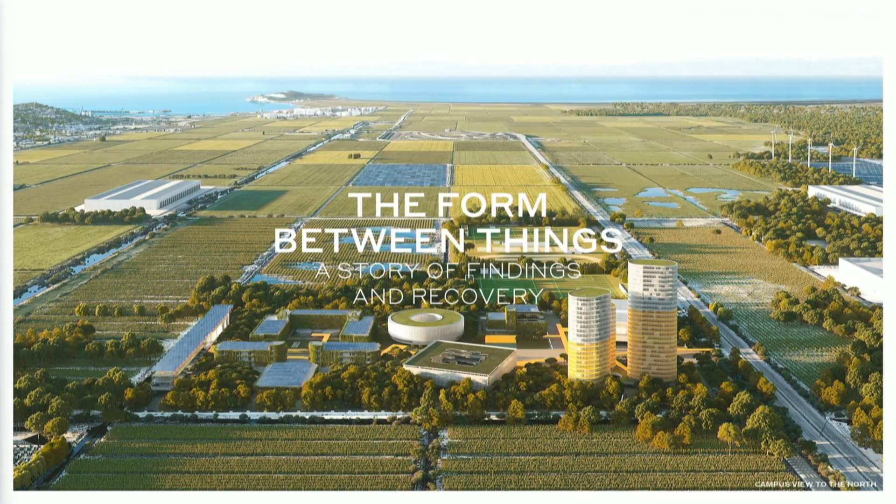I was just going to present for a second this story that we have told, the story of findings and recovery. This story is a story about architecture, but not only about architecture. It's a story about landscape, about the territory, about resources, about future development. It's a story that talks about water, not only rainwater or salted water, but also underground waters from the aquifer that we have below our feet. And it's a story, finally, that talks about the public space, and a story that talks about the space between things. So for this story, the storyteller today is going to be Fernando Rodriguez, my partner.

I am Pablo Oriol from FRPO, and I have to just present quickly the team that we are accompanied with. They are here with us: Porras La Casta Arquitectos and Walk Architecture and Landscape from Madrid. They are the designers of beautiful public spaces around the world in different places and territories, but also of recovering landscapes. They have a wide experience on this, so we wanted to be accompanied by someone that could understand the territory in a deep way.

We have also a studio from Tirana. They have local knowledge of the place and have been working for many years on the Durrës strategic projects. We also had a very strong group of technical consultants, among which we want to mention Teo Lopez, the most renowned energy consultant in Spain. He has worked along with the Geothermal and Geologic European Institute in Spain from CSIC, which is the main investigation institution, and that has helped us to work on this. So this is the team that we have been working with, and I leave this to Fernando to start the story.

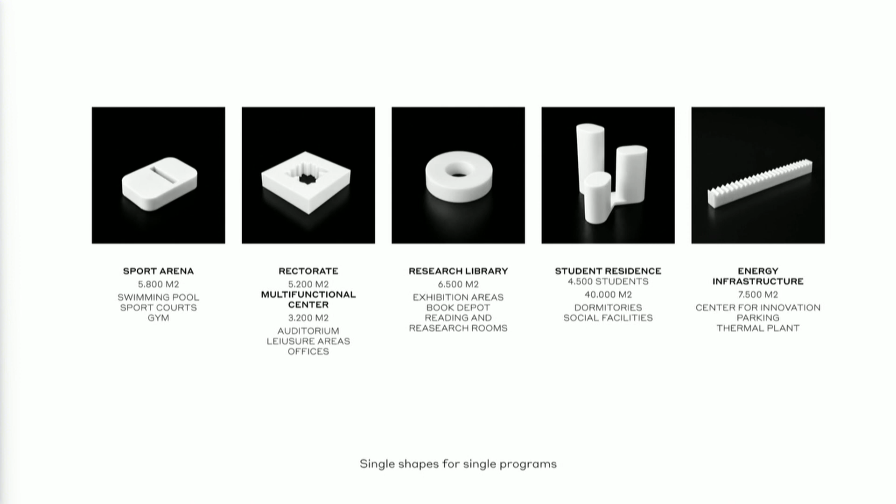This is a story about single objects, single shapes, very direct, simple but different, providing a single identity for single programs that can be easily interchangeable. This is also a story of master planning, which allows different architectures, also maybe architectures from other teams in this competition, to be part of the main idea.

Master planning is not that much about buildings, but about the form between things. It's not about the well-known megastructural approaches from the 1950s in universities across Europe that we all know well, but probably about a more careful way of inserting programs in independent elements that can be approached in different phases.

This all happens in a specific territory, which goes from the wetlands to the beach, a territory waiting for its logic to be unveiled, a horizontal territory with no reference at all.

We have been here many times already. It's organized in different layers, with urban artifacts, existing infrastructure, this new infrastructure which is the railway, an amazing opportunity to link the whole area to the metropolitan area, an agricultural pattern, green areas, and also a very strong and present water system.

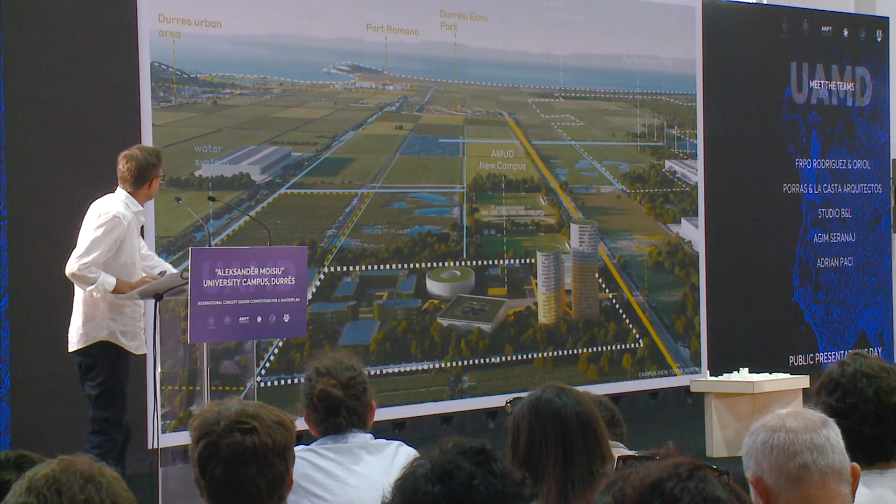These layers are taken into account and used to design the new proposal, thinking that they also provide the logics for future development of the whole area. The campus would be like a prototype to develop the whole area in different ways.

In this superblock model, a very simple and direct approach, it provides different percentages of the elements used in the project, like footprint, reforestation, water surfaces, permeable ground, and roads, so these guidelines can provide different approaches.

Of course, the campus superblock, but also to generate industrial or logistic superblocks, to maintain or remake the agricultural superblocks, or even to address what happens in this residential area to the south that needs to be reorganized without being completely substituted.

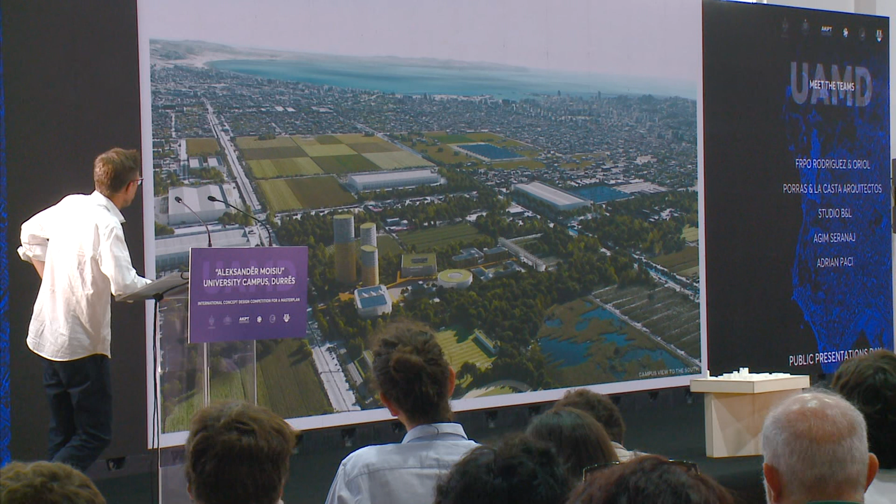This contains as well the logics for the extension, the future or possible extension of the campus, or the campus to the west, in a way that what we are providing is a prototype for the development of a bigger territory.

Form matters, but not so much the form of things as the form between things. This sentence by architect and professor Stan Allen, which has been with us for many years already, is very clear about what we understand a campus master plan should provide, which is public free space for things to happen.

Indeed, a very important public space in the middle, which is a big void, a Mediterranean public space paradigm. The proposal tries to embrace the center of the master plan with our reforested forest, placing different buildings to the edges, to the outer ring, to maximize this void that takes the cars outside, circulating them in a ring road, and maximizes pedestrian space.

This central area, which we call the spine, provides public spaces that are really the most important areas where university life takes place, the exterior areas where institutional events, random events, or spontaneous meetings take place, giving a real character of university life.

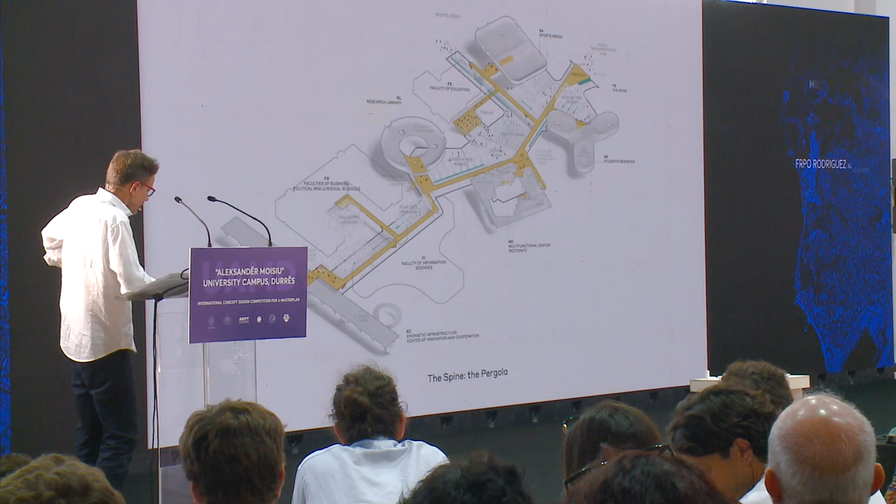The second element, the pergola, has to do with traditional elements throughout the Mediterranean area. It's a very simple, painted concrete structure that allows connecting, provides shadow, and also builds a series of episodes around this public space, which intertwine with one another.

Like a main entrance to the west, a central agora with a tribune in the center, a central agora with the dry fountain also next to the tribune, cherry gardens and fruit trees, different orchards or even meadows for resting.

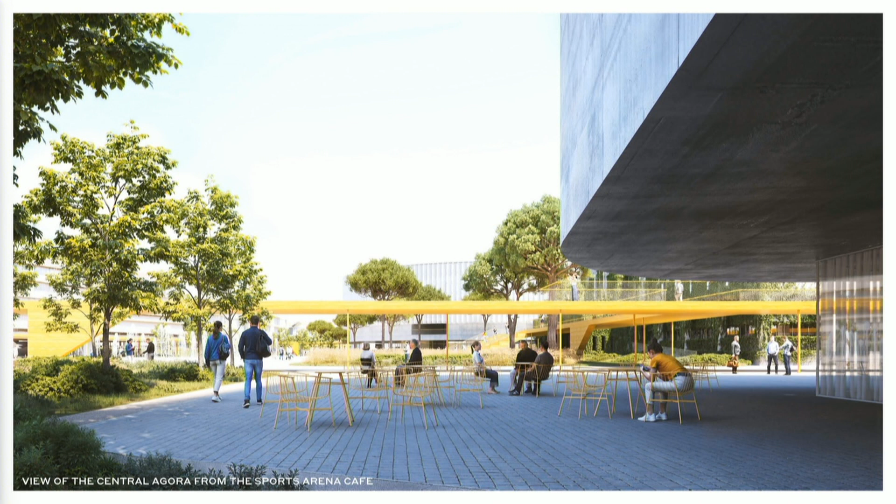These are some images of this space in between the buildings, formed with different features, mainly with grounds and this intertwining element, generating a sequence of different spaces throughout the areas where it collides in a way with the proposed buildings.

The natural history of this territory is very rich, and it allows us to think about the idea of third nature. We all know about first nature, the native marshland landscape thousands of years ago, which became second nature, a man-made agricultural landscape in the second half of the 20th century, and which we propose to transform again through this third nature idea, or performative landscape.

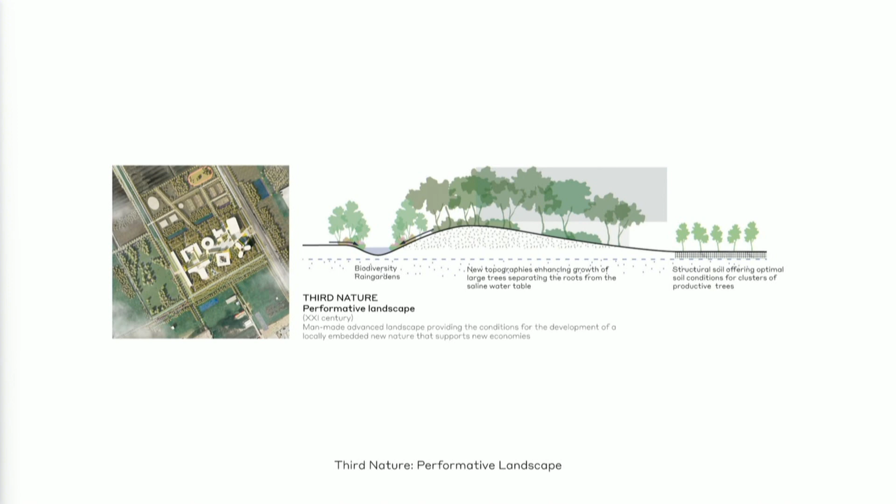This is a very important part of the project because it provides the conditions for this natural surrounding to really happen in such a salty and not that good environment as we have seen already.

This performative landscape is built out of three actions. The first has to do with drainage, waterways, and water surfaces. The second has to do with building soft hills and mounds, which provide new soil for the pine trees to properly grow. The third is a more controlled nature within the public space of the spine, which relates more to gardening and recreational spaces.

This provides a sequence of different sections, in which the whole space of the university is modeled out of these three actions: the perimeter ring road, the perimeter rain gardens, the in-between forest hills, and the pergola within the spine in the middle.

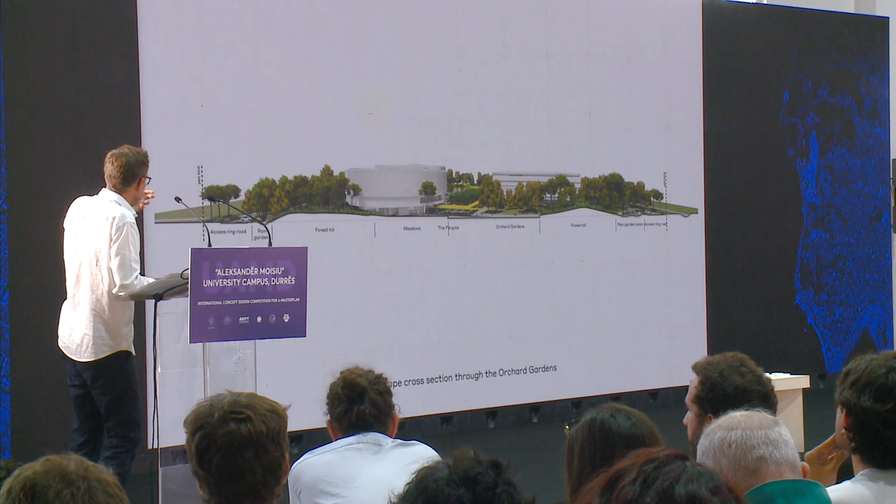This surrounding nature, filled with wilderness and water, keeps the cars outside the center of the project. It has different shapes and always intertwines with the spine beneath the buildings, providing back accesses to the main programs, which then lead to the main public space in the middle.

The spine, this void, this public space which is the core of the master plan, is made out of four main kinds of landscape. So-called hardscape, like pavements, provides circulation and meeting spaces.

Softscapes, which is about different kinds of vegetation that take the nature of the area inside the plot. Ground and waterscapes, which recover this beauty embedded in the water.

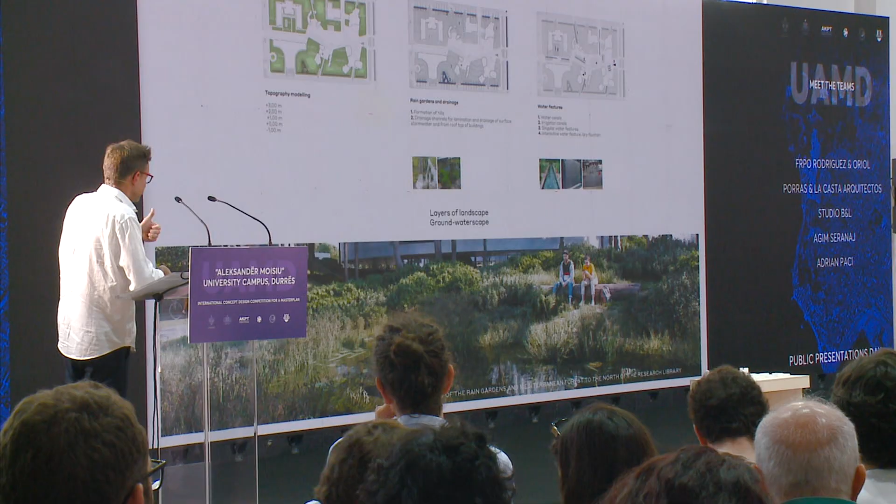And eventscape, which provides situations for big meetings and university life to happen. There are some images of the back gardens.

This is about visibility and feasibility of a public investment, which for us has been something we struggled with a lot in making this master plan, because we needed to place 4,500 students inside, which is a lot, and we thought there was also an opportunity within this territory.

We thought about making the public investment visible and connecting the university to the city, making the citizens connect to the university, throughout these student residences. Some kind of financial building strategies will provide us the idea that the residences and also the energy program might act as an asset.

An asset that can easily move from a very compact shape to a more disaggregated and phaseable group of elements, which could be interesting for a public investment and for a private investor, providing a kind of public-private partnership, and therefore connecting the students to the territory through the views from these residences, and the citizens to the university, with this element acting as a reference in this horizontal landscape.

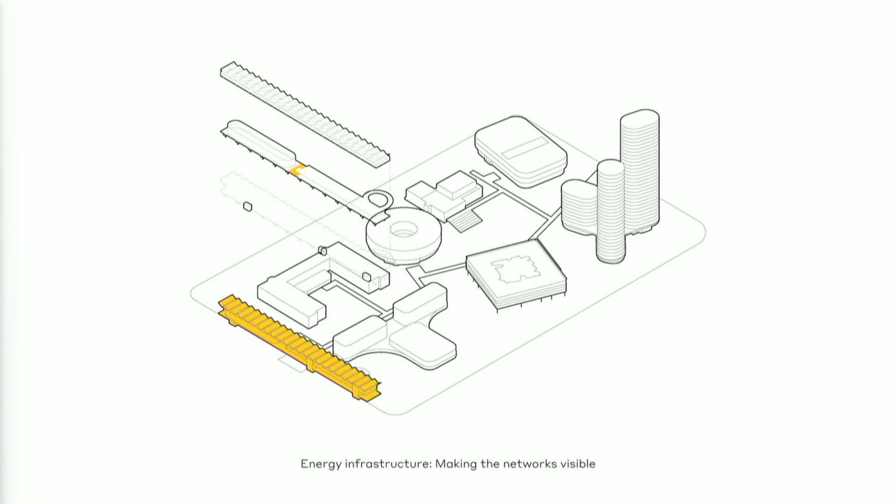This one we can see here, which is also hosting the main parking, the power thermal plant, and the innovation center, provides this kind of image of the campus as an energetically aware condition that links the campus to a very contemporary debate. This is an image of this energy infrastructure closing the campus to the possible future expansion to the west.

We're almost finishing. The 7th chapter refers to the fact that universities act as a social infrastructure, right? This image of the FAU by Vilanova Artigas, this beautiful, amazing project we all know, talks about free ground, about building open architectures for things to happen, underlying the idea that what we are providing is much more like a series of guidelines to build some buildings.

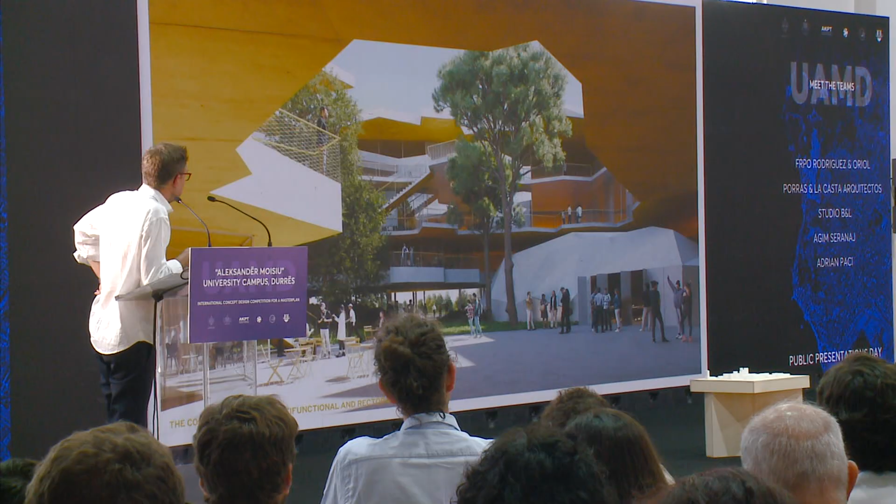Rather than architectures themselves, by making all buildings elevate from the ground and generating this free ground, trying to build always with concrete structures and light programs on top, making patios inside every building, providing passive measure envelopes for each of them, so they can host these programs in a very simple way in each shape, while maintaining character in general terms as the general guideline architecture rather than build-centered design architecture, which is what we wanted to present here. I'm finishing right now with a kind of epilogue summarizing these ideas.

Please, your time is expired. Thank you so much.

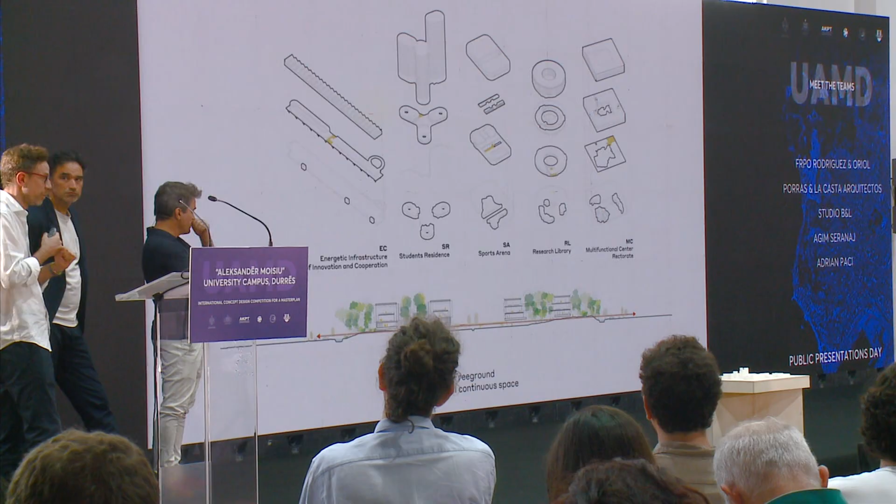But the most important thing for us is much more what these five examples summarize - like the idea of making the ground floor free, reduced to the minimum expression, with the program laying on the ground floor, concentrating heavy programs on the first floor, which are also accessible, making the first floor accessible, and trying to organize the upper programs in a very rational way, always around the patio. You want to add something?

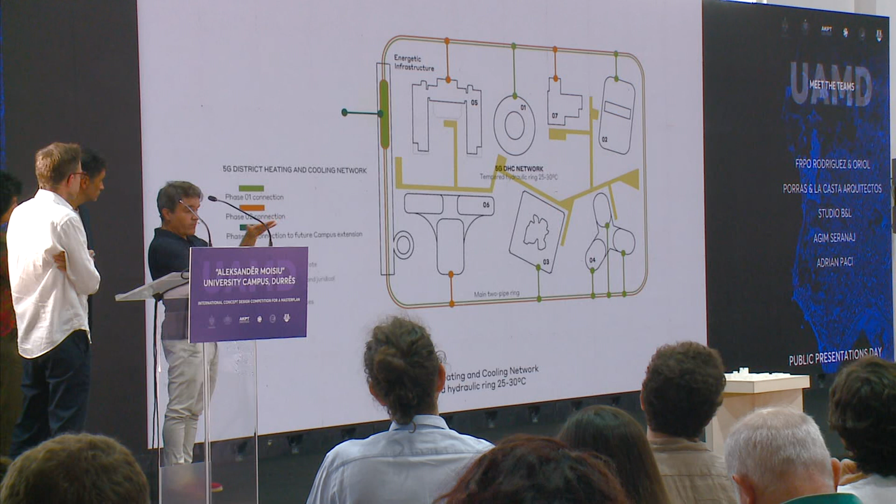And you were asking, Christian, about the pergola also, about why that element. This relates to what Fernando was saying about the connection of the free ground - that's the whole point of the pergola. It's an element that, in a very cheap way, can connect everything and give an image to something that will develop over time, maybe made by several different hands. This element works with all these conditions of the ground, the free ground, the two levels, etc. But it's also giving, in a very low-budget solution, a specific character to this campus. This is also the reason for it.

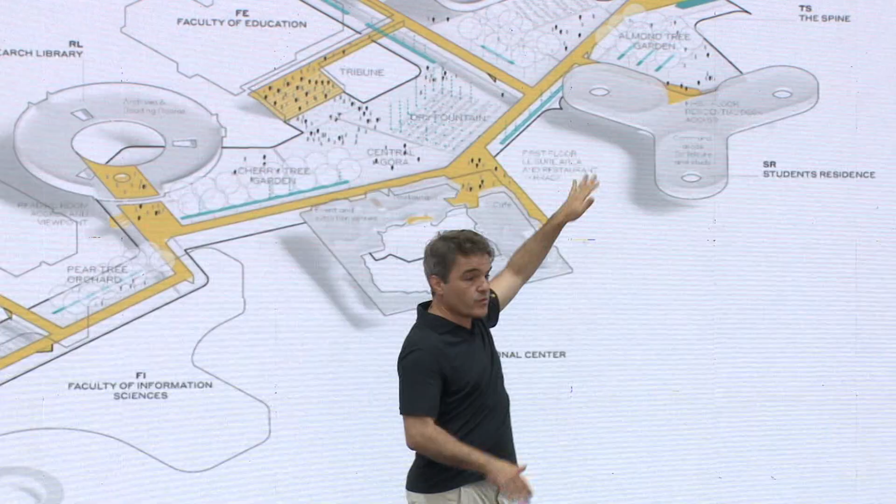But the pergola is not just a pergola, it's also a bridge. You can walk on top, but only at certain points - not that you can walk all around it. You can use it to walk up to this element, the tribune, or there's a ramp that goes up and uses part of the pergola to reach the upper level of the residence. So it's a pergola, but also usable accidents to connect and bring the ground level up to the first level near the buildings.

Why can't I go all the way on the bridge? That's a big question we've asked among ourselves many times. I think the answer is there's no need for that, because you can walk underneath, in the shadow, or when it rains you can just walk around the whole thing - no need for bridges connecting all the buildings. This is about landscape and free ground.

But then why should it be one continuous thing? Couldn't it be fragments? Why do you need the figure of a single element? It was a very simple question - about being able to go from one side to the other without getting wet when raining. It was this kind of super functional decision, because we had many different options, as you may have seen. But in the end we decided to make it super simple.

It's something that takes you from the main access to the east to the secondary access to the west, and allows you to leave your car here and get to any place without getting wet or staying in the shadow. A very functional condition.

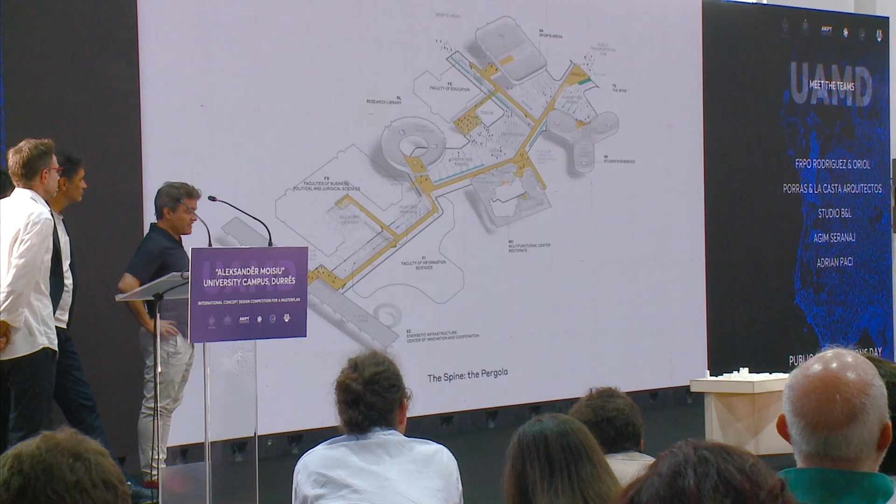May I do a very innocent criticism of it? I think it's a bit too thin - you see in the renderings there's not much shadow. It probably should have been a bit fatter. Why didn't you?

We did it low on purpose, as low as possible, because we thought you have to connect from down to up with these connections. We did it low because we're in a Mediterranean situation where you have to be covered very near your shadow, not with high canopies but with low things. It's like 2.80 or 3 meters inside, and 4.50 wide. So it's also a matter of a delicate element, something that can be very cheap and easy to work with. There was an image of Mathias Goeritz's El Pájaro de Fuego, that beautiful but very cheap concrete sculpture in Guadalajara, Mexico, which has had a very powerful impact in the area as an attractor of public space, with very low means, very easy means.

But maybe you're right, Jesus Christ. No, I'm thinking of something like the Ibirapuera canopy by Niemeyer - it's really, really large. Because in order to produce a lot of shadow and generate the climatic effect, it needs this kind of section. But okay, it's an open discussion. A month ago Fernando and I were in Ibirapuera talking about this. But that's another thing - it's a huge element, very deep. We didn't want to make it so huge, but very delicate.

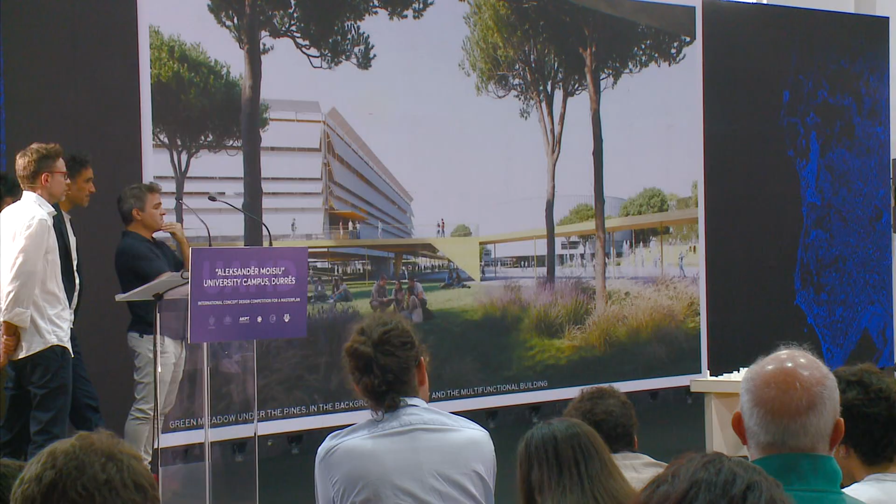Thank you so much for the presentation. I want to congratulate you on the material you're showing - the drawings are beautifully drawn, the model, everything, the atmosphere you're conveying through the images. I guess my only question, since you responded not only in the presentation but also through the material to all the questions one may have, would be...

How does this canopy, which is kind of like the signature, the thread that connects everything, with a specific geometry different from the straight geometry - which I think is perfectly fantastic - how does this broken geometry create in-between spaces, which I think is the intention, and connect existing with new? And how could this master plan be implemented or somehow connected to what happens in the rest of the area, if there's an intention for that to happen, of course.

It's working? Yeah, so indeed it comes together with the question about why not making a bigger straight line and more clear, connecting from A to B, but at the same time creating spaces, as you have mentioned.

We wanted, from the beginning, we understood that there were 3 areas. One was like the entrance area on the right side. We had a central area, like we call the central agora, which is the largest space that we wanted to keep intentionally open.

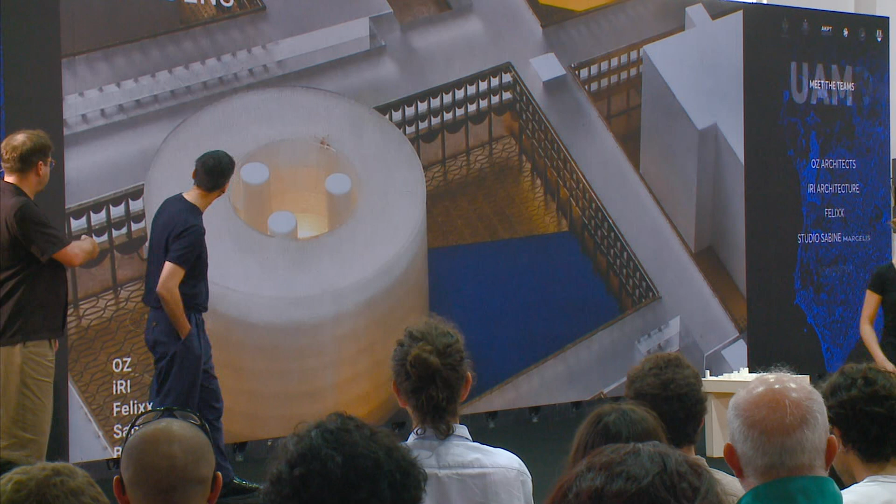Can we start with... oh, it's a bit wrong.

Good afternoon. My name is Andreas Caravanas, and together with my partner Stefan de Koning, we are representing OZ, and together we are going to go through our project, Live in Gardens.

Maybe Stefan. Yes, we're here together with our great local team, IRI. They're well represented; we have a long relationship with each other in the business. Felixx Landscapers are very well known for their Dutch approach, being experienced in polder landscapes. Also, they work with both greenscape and bluescape.

Sabine Marcelis is part of the team for color and materiality, a great inspiration for this project, and Buromilan has been very supportive in making this a very feasible project.

So a driver to participate in this competition is also reflecting a bit on our own work. The Hive is a project in the Netherlands where the old and the new coexist. This is very applicable for this location in Durrës. Here we elevated the existing structure, meaning the landscape becomes undulating and the binding factor between the old and the new. Also, main entry zones become part of meeting and collective spaces.

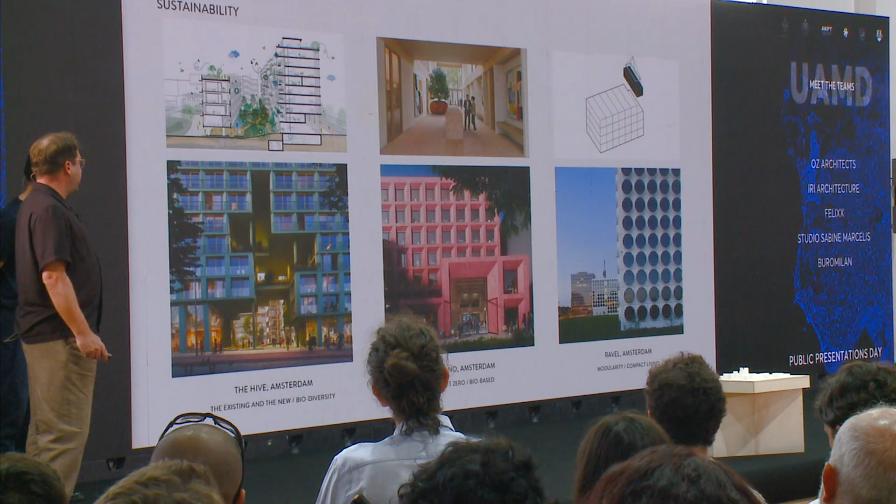First of all, student housing is something we are very experienced with, and this is a modular structure which is very adaptive and affordable.

Now, within our projects with student housing, we always deal with high densities. But what makes it a proper student destination or place to live? It has to be affordable, effective, but at the same time it needs to be a self-sustaining compound.

What we apply here is places to reside and to meet. Sure, color is an iconic instrument to make it a presence in the vicinity.

Then the Ravel project in Amsterdam on the right is, you could say, like an enclosed enclave. It's in the middle of the future CBD to be constructed, so it tries to protect itself from its surroundings. What is relevant here is that the facilities are such that it's not only for the residents themselves, but also an attractor or a hub for students.

Abroad. So what can be a very good strategy to make the projects feasible is, we have two exemplary projects called more like student hotel mixed with student housing, meaning that residents can leave in the weekend and the rooms can be rented out to temporary visitors. You have a double occupancy and a double revenue.

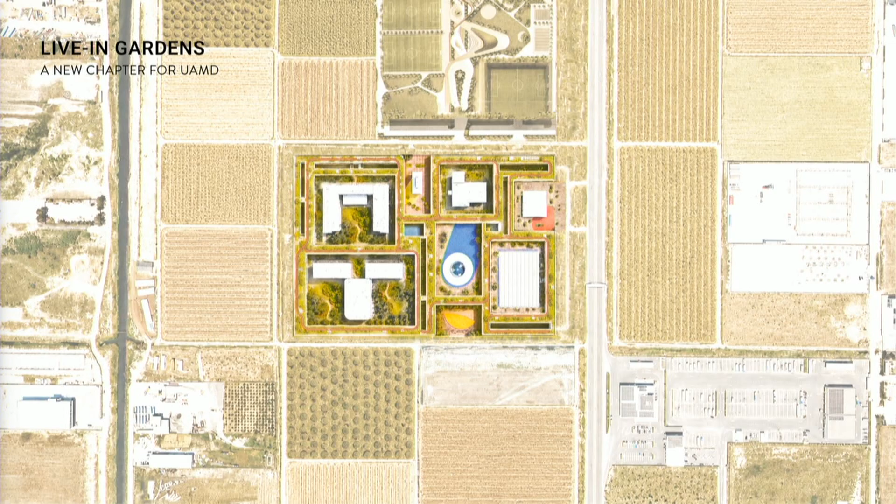Then when we look at the site, and finally the project, what is intriguing to us is the kind of tapestry, the patchwork of agricultural context. Yet, at the same time, we know that in the future a lot will be developed. So our strategic approach was to make a walled city, as you like. It is deeply inspired by the patchwork, so it is like a continuous carpet of gardens.

And from looking at Durrës, it's been addressed many times today, we actually embrace the medieval history and its walled former city with landmarks. Maybe it refers also a little bit to the kulas and the fortified towers. And this is an inspiration to create a master plan that kind of correlates with this.

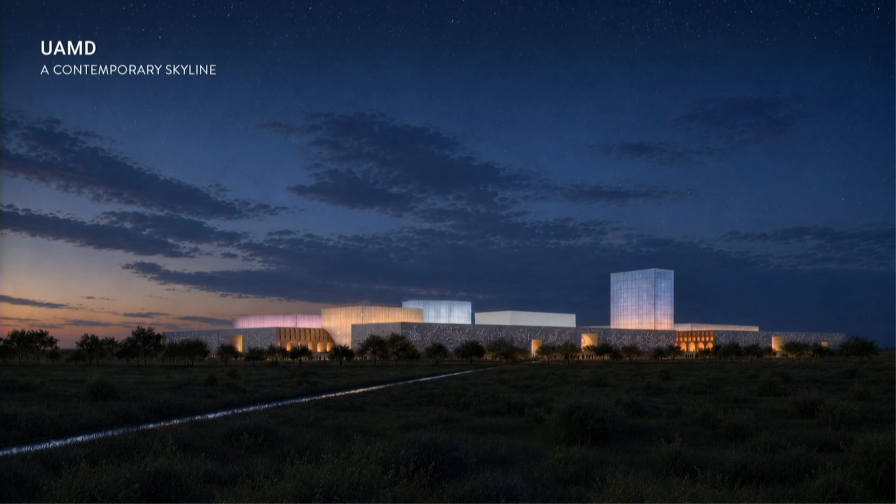So what is important for us from the beginning of the project was that the approach towards the site becomes also a reference for Durrës.

So what you see here is how we approach the site. You have this lower level, this donut with housing, and then all the other buildings as transparent lanterns referring to the medieval city. And the way that we created space is through a reference of Oda, where it's a meeting place in a house where other rooms would meet. So we almost literally started analyzing the decoration of this space and the centrality of it.

And then we come to one of the images, one of the courtyards that we are creating, that it opens up to the landscape. And it always has this central element that it's the educational building or the public building. And how we came to that.

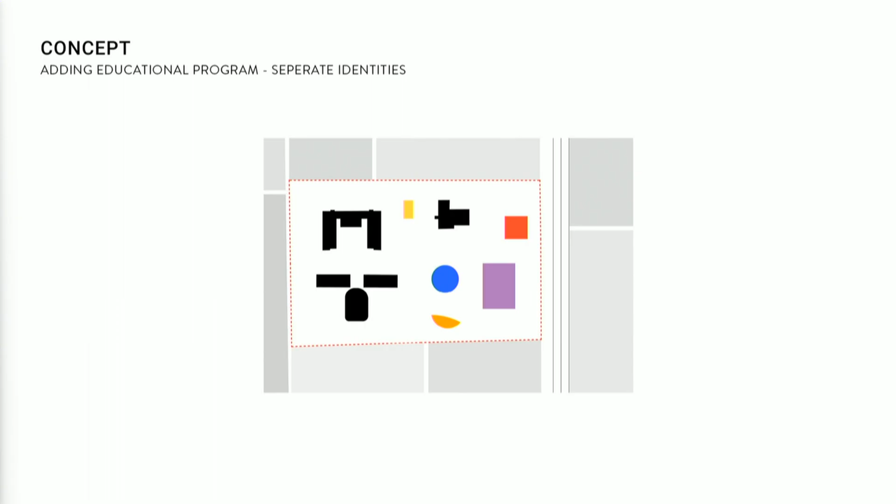So we took as a given that these buildings exist and also the agricultural grid. So we said, okay, whatever is educational program or administration creates its own identity. The color comes also later.

And then what defines also a medieval city or a kind of center of the city is the housing. So what we wanted to do is to create a kind of element that occupies this area and creates the courtyards. But what we didn't want to do, basically, is not to have a modernistic kind of approach.

So all this becomes not a linear approach, but it has elements where people meet. So all these courtyards become an enfilade on the ground floor. And then what was also important for us is that you have designated areas where you enter the site, but then all the other site is not linear from A to B, but it creates all these spaces where different circulations meet and occur.

So exactly this, the housing stays very low. It's intentionally made in order to create interaction and to activate the level of the ground floor. So not standing buildings, but also all the housing becomes part of the landscape. And no tower, basically, so we don't stack housing.

So at the end, you enter a site where open and closed becomes one. So here you see the plan where all the yellow part is covered, it's a portico. And then from one side, you have this kind of Mediterranean approach with a portico that opens up in the middle and creates this main square.

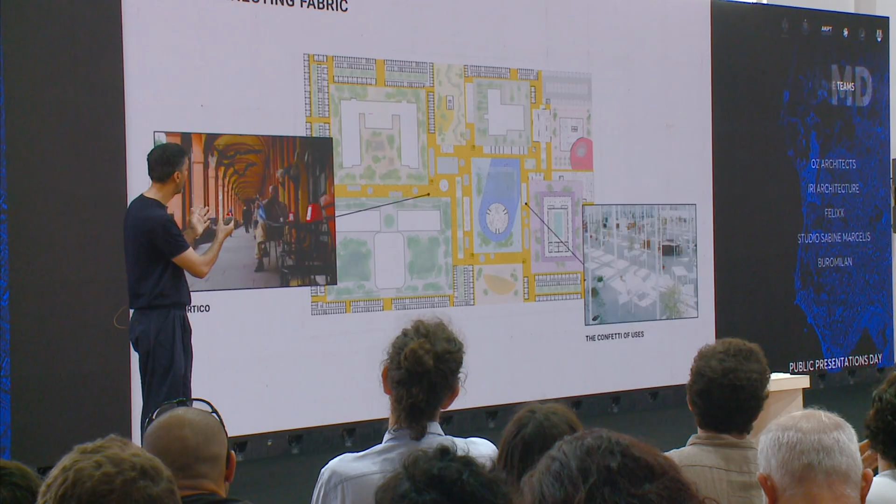So we have a definition of squares also. And at the right side, you see that there are all these confetti of uses in the space that generate the space.

And the color is something that, of course, we worked with our artists on, but we also wanted to make the squares bold, but also not in a literal way. So we wanted to create for every square an identity that relates to the heritage of Durrës.

And then we have the approach. So every courtyard has its own facade, and it again creates a mosaic of different spaces. So from space to space, you are getting to a different geometry. And then this is one of the squares where the pattern of the ground becomes almost a carpet, and together with all the others, they are creating a continuous carpet.

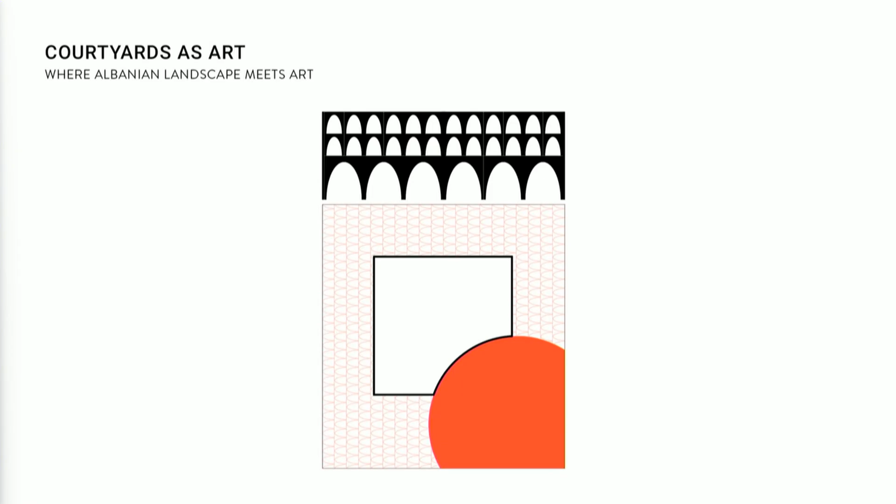And here is the inspiration, the work of Sabine, that we worked together on. So both layers are coming back to the project.

And then we have the entrance, the main entrance from the axis, where you have the Meet and Innovate building. The transparency of the buildings, you will see also afterwards, relates to a kind of administration that is not hidden. And then all around you have the housing. And then we go to the landscape.

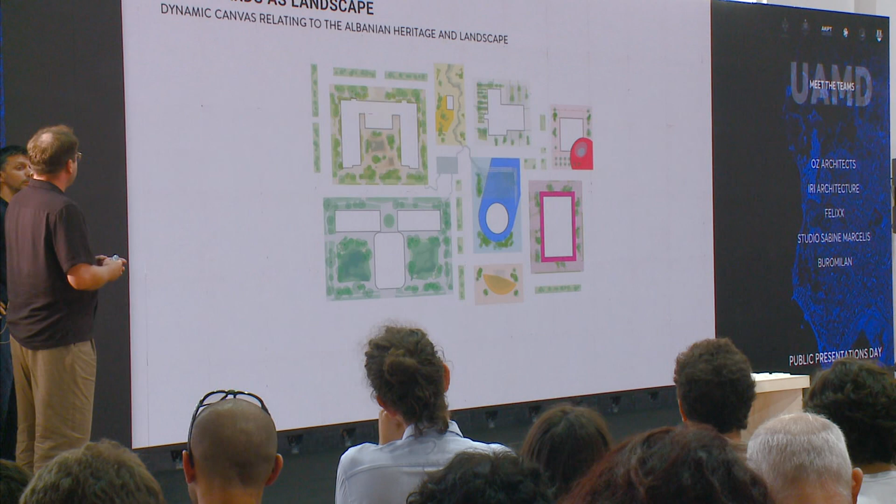So for the landscape, as explained, it's a continuous carpet. Yet within the courtyard, different landscapes can coexist. Some are more dense than others in their greenery. For example, around the existing study for politics building and the business school, we envision a more garden-like landscape. As of today, we see the plantations here as well. Others, which are more related to the context and arrival, can function more like piazzas or plazas, also containing more flow and population of people.

Now, looking at where we come from, to maintain this landscape and to embrace it, Felixx was very clear: we have to stop fighting water and natural elements, and instead embrace them. The site actually used to be in the Adriatic, and after becoming a lagoon, it was poldered into an agricultural site, as of today. Now, urbanization is going to happen, and what we embrace is this grid approach of linear canals and master planning.

Now, to bring this into the... it's not working? I think yes. Okay, thank you.

We foresee each landscape can actually have a different theme, and it can have its own character. What is it based on?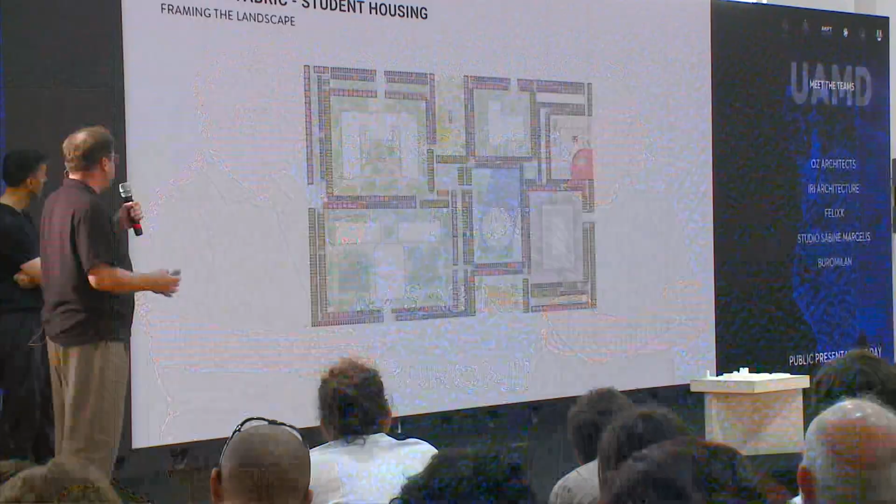When we come to the housing, it's basically an organizational principle to define the different gardens and piazzas. What we try to achieve is a permeable, accessible site where everything is also naturally ventilated and illuminated.

Each room can have a view to the garden it links to, so there's always light conditions and natural ventilation. Also, we propose to recess the facade and make a French balcony typology for shading devices. The grid, the system, the building methodology is such that different typologies can be applied here.

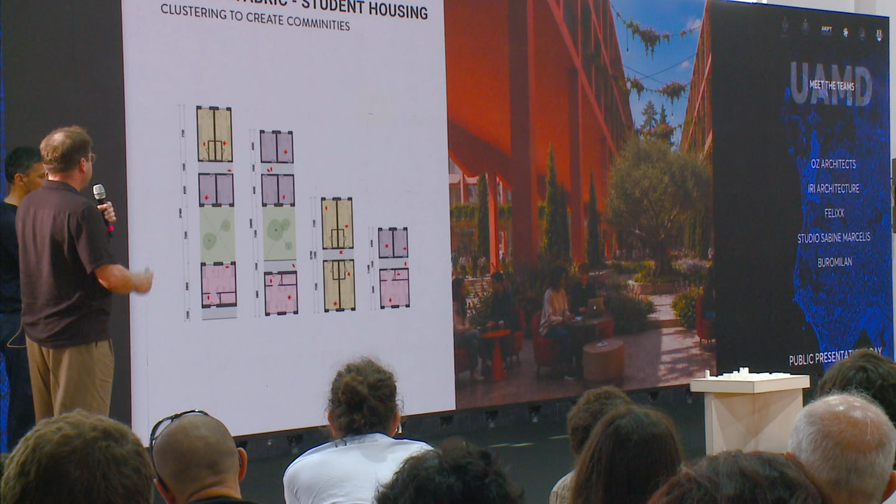Thank you. A room without facilities, a double room, and for every 20 rooms, more or less, we foresee a common living room. This is an impression of what it could be. We also have mini courtyards where many rooms are organized around, creating micro communities.

Then we come to the educational program that defines almost the center of every square, almost like in a medieval city where every square has a different public program in the middle. So you have Meet Innovate, library, sports arena, and rectorate.

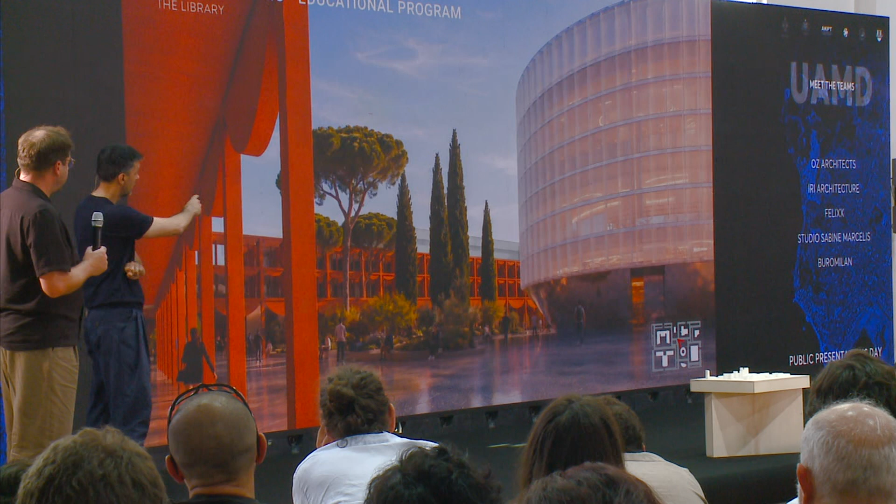Starting from the library, as you see in the scheme, it's the middle square, the square of the city, where the landscape goes into the building. You have a stacked program of the library and the museum, and in the middle it becomes a kind of amphitheater where people can meet, so the whole ground becomes one space.

The arena has its own courtyard too, with the same approach on the facade, where you have a stacked program of swimming pool, sport facilities, and arena on top, so the swimming pool on the ground becomes open to the courtyard.

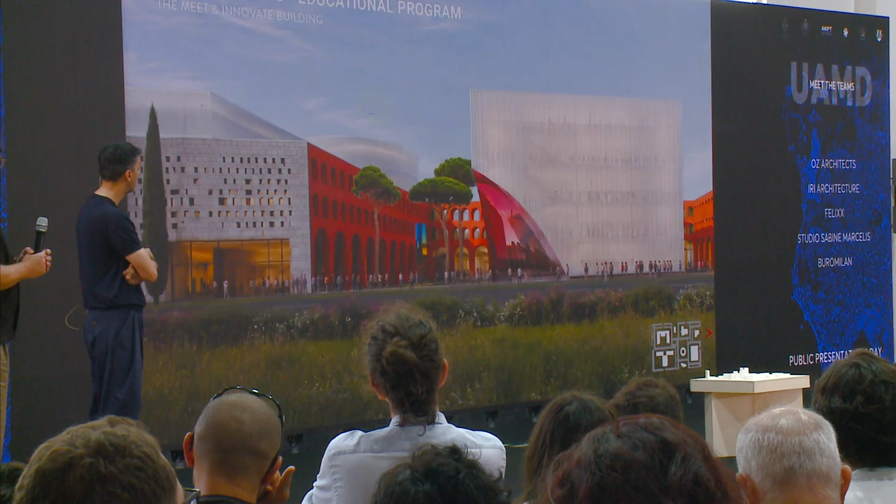Then the main access from the street, and what you see when you are driving, is the Meet and Innovate building, where basically this red carpet expresses the facade, and again it's a stacked volume with different Meet and Innovate programs. This is how you see almost every square.

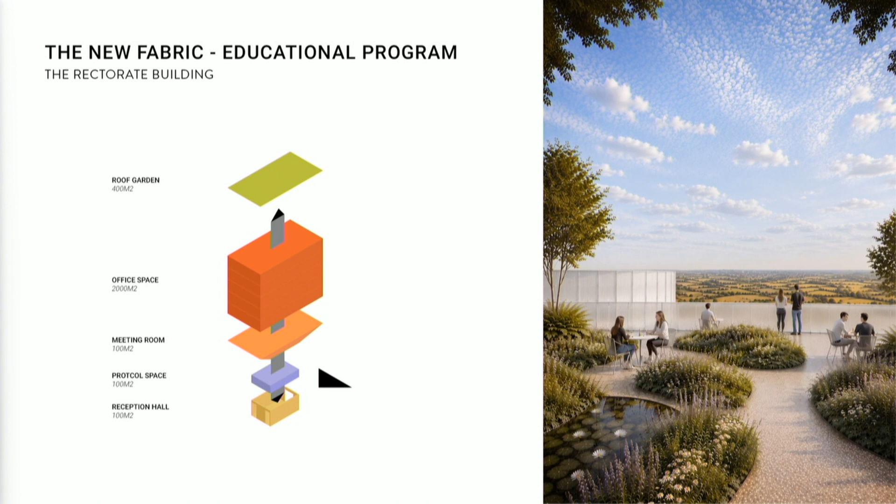And then we have the administrational building, which we don't want to hide, so it's part of one of the landscapes. It becomes on the ground a sculptural garden, and around it, it also has housing. On top, since it's the highest building we have, we are creating a roof garden where you can see the landscape all around.

And then going a bit to feasibility and construction.

So we have some phases here, but what we are trying to create is a system. This system can also change according to planning. We are proposing certain phases on the way this can be built, but it's almost an organic kind of process. And the same thing also for construction.

We thought that we can even create modularity, so within the site to construct we don't have big cantilevers for the housing, so we can create all this relatively cheap.

And sustainability, obviously there is the environmental sustainability. We don't go for one big gesture, but different types, as Stefan explained before, the rainwater or the wadis or the cross ventilation that for us was important for the housing.

And then the roof and how we can occupy it. And then for financial sustainability, we thought it's interesting to tackle that because of our experience also.

One part could be, there are three models. One is the idea of occupying the space of housing in areas at a time when students are gone, so in summer for example it can be used as a hotel. And then renting out areas for cafes or events, that's the second strategy. And then the last, and that's why we put the arena close to the street, you can have more membership also for sports facilities that relates to the city.

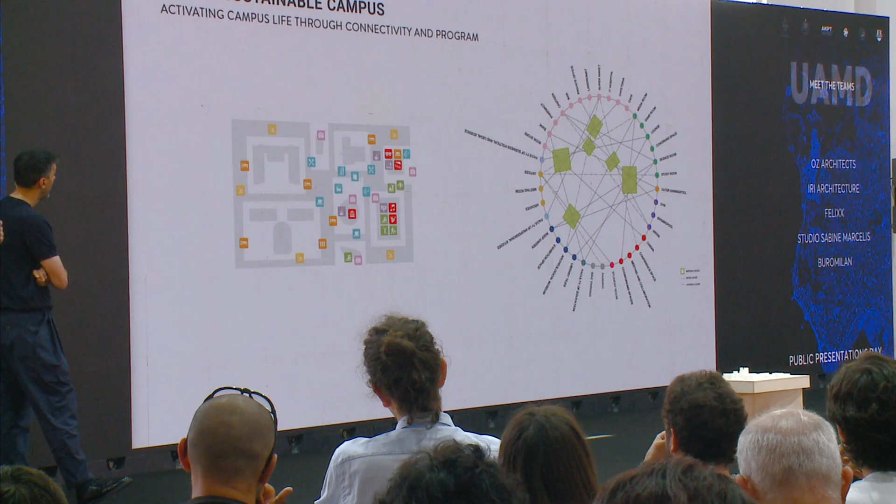And we come at the end to social sustainability, where actually by creating all these programs and adding more to the program you had on the ground floor, we are creating all these courtyards and certain elements can interact within them. So we are referring directly to Durrës, symbolically because of the skyline and the idea of the medieval city, programmatically on the ground floor and how you can connect to the city, with all these courtyards relating back to the city of Durrës.

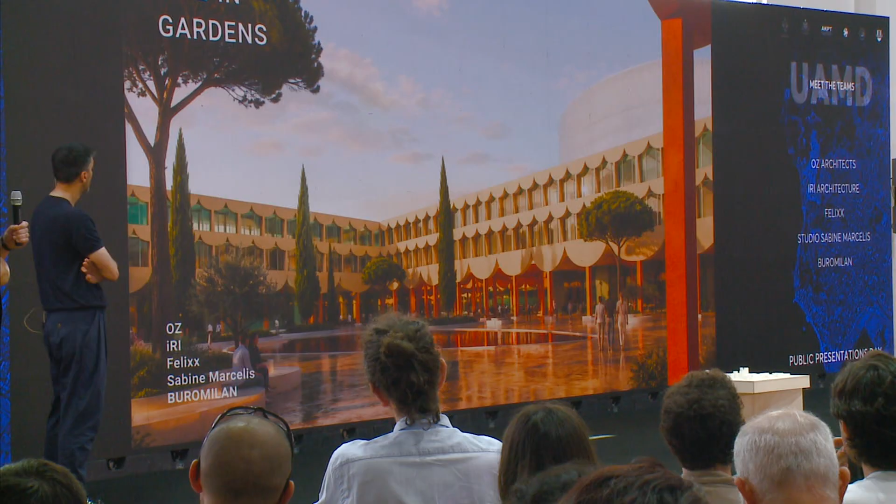So we have a video, I don't know if it's possible to play, probably you.

No music? It's okay, the music is missing.

It's more about creating, showing the idea of scale and showing all these passages and how these courtyards relate to each other. A very important choice was to make 3 layers.

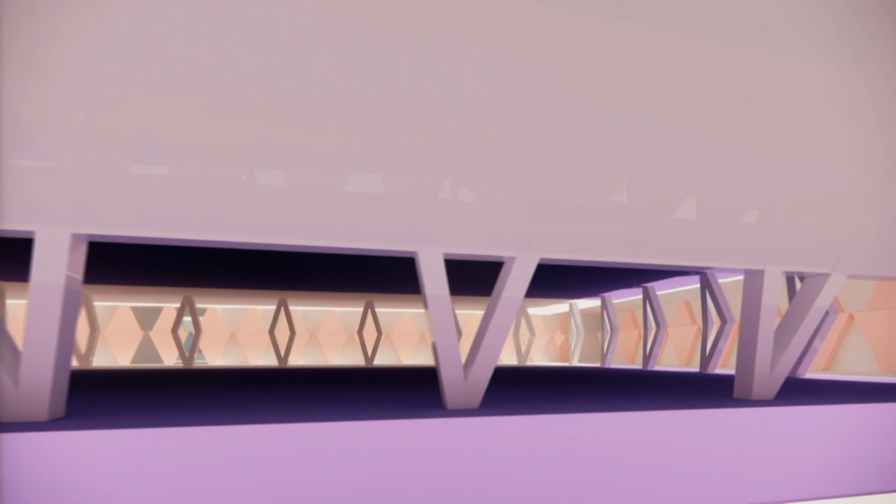That means we can accommodate all the mobile people without any elevators. Everybody can access their house from the ground directly.

And student life is really oriented on the grade, on the public domain. A mix of vegetation and porticos protect you from direct sunlight in the summer, and the porticos, of course, also from the rain.

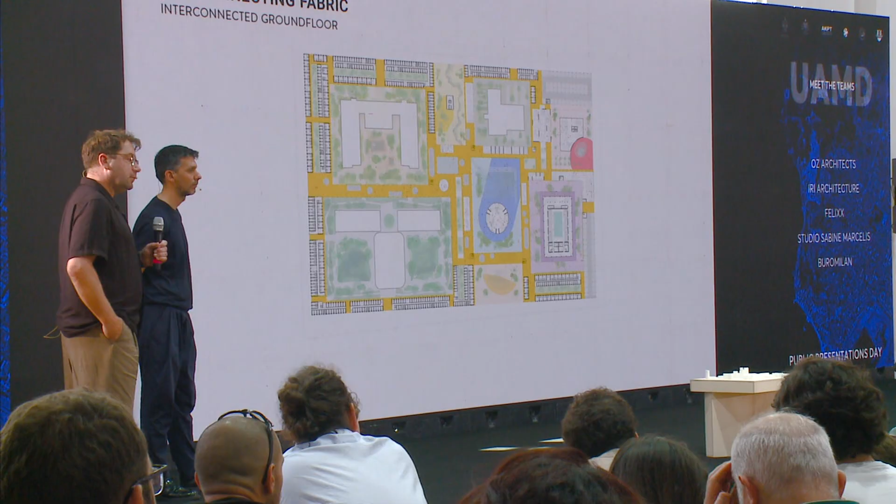And I also wonder if the leftover space between, let's say, these main buildings and the framing, is enough surface to really be recognized as a garden, as let's say an authentic garden and nothing else. I'm more kind of wondering where you would see, let's say, the main perception of this university in terms of an image. If we imagine the university here also wants to attract people from many different places, what is, let's say, the main trigger point in the image creation that you are proposing?

Well, I think there are different layers on the reading of this. In terms of image, you have what you get when you are outside, like these lanterns of the buildings with administration. But when you are inside, you have this porous kind of carpet with different landscapes.

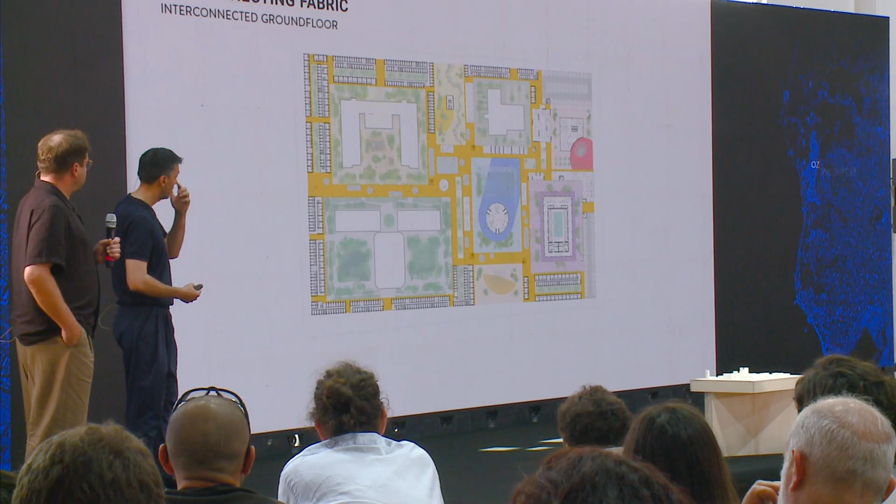I understand what you are talking about, these framed gardens. The idea is that we wanted to create a system, so the size of the rooms can also vary, and we can have even thinner bars. For example, now we went to a kind of thicker bars, but you can also have thinner bars. It depends on how the system we want to grow.

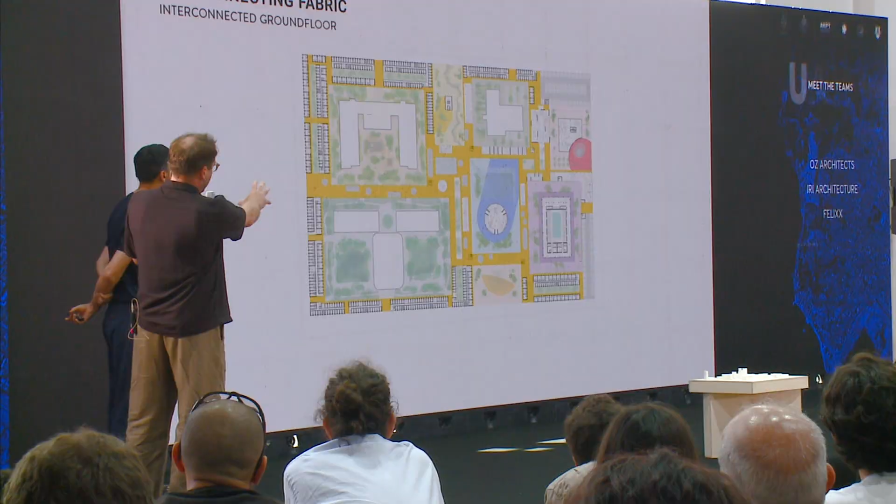I think it's important to recognize the open gardens that are facing the streets. Yeah, making the project more, having more of arrival experiences as well.

Can I just ask you to develop an idea? Because when I look at this plan, it looks like you are designing cloisters with the building in the middle, but this is a bad way of looking at it, because you are actually proposing a very continuous open space with a pergola on top, which is actually what happens in all the center spaces. So this kind of ambiguity between defining these gardens, limited gardens, with a building in the middle, pre-existing or proposed, and to propose a continuous matrix is only approached by a very shy waterline that crosses everything.

Can you develop a little bit more your will of making it continuous, actually? Yeah. If it is so, do I read it well?

Yeah, so I think the ambiguity is actually a conscious choice. Because I think there is the freedom to flow through the landscapes, yet at the same time there's this organization of shaded and protected circulation that gives you a double possibility to flow through the project. But it was on purpose that, let's say, the public facilities are linked by gardens and this permeable open space.

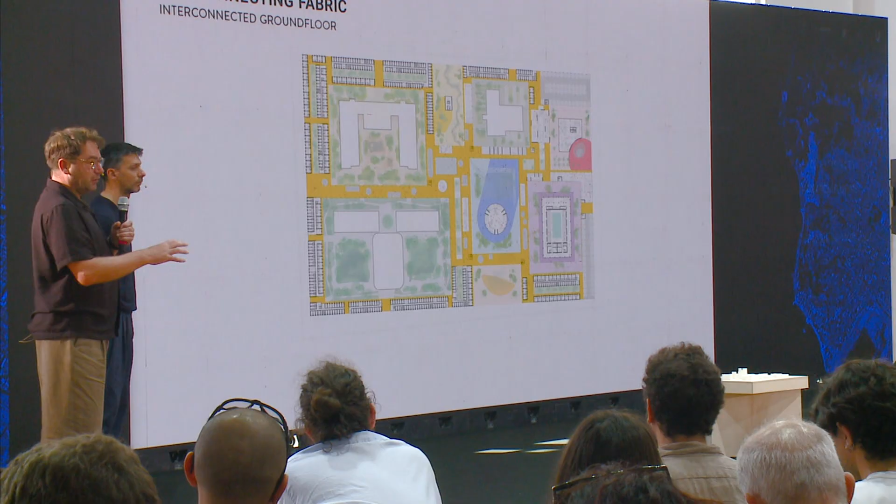Regarding the water, the project is literally linked to the canals in the vicinity. So that means, look, in heavy rainfall, the roof, we have a significant roof surface, we acknowledge, that was consciously for bringing all the people down to the ground. This is the first retention layer, and then the gardens itself do the same.

That's why I talk about a polder, like the water levels can change during the seasons. So maybe a canal becomes more like a wadi, etc. That's why the majority of the garden surfaces are actually full ground and not hardscapes. We think in the plazas, piazzas, it's more of a high greenery, canopies, to have this local heat island effect tempered.

And that is actually throughout the whole project. We really approach it as a self-sustaining city, and it was conscious to frame it this way because we really believe that the phasing around in the larger zone will be quite rough, honestly. There are logistical businesses being built, there's agriculture which is not always healthy, so it also needs this protection layer.

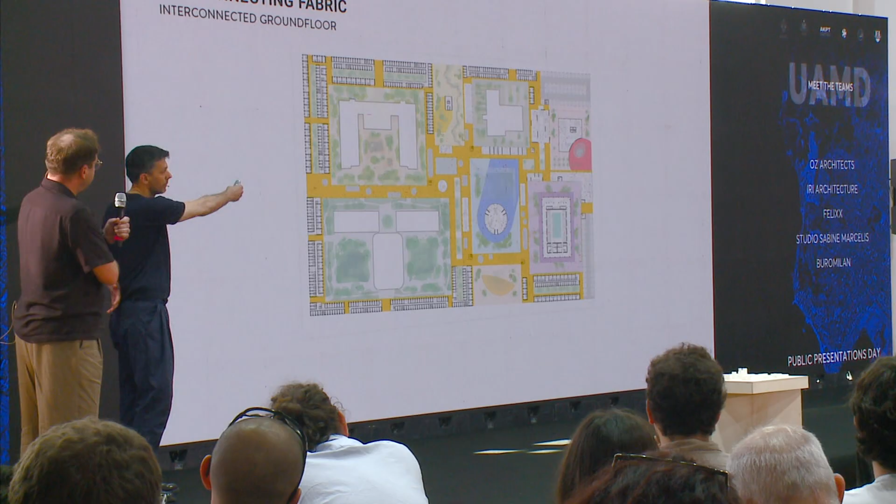Is there a parking garage underground? No, underground, no. The parking, as you see, is mainly related to the main street there, but there is possibility also. So there are two parking layers and a street that goes around, so it can facilitate also logistics and everything.

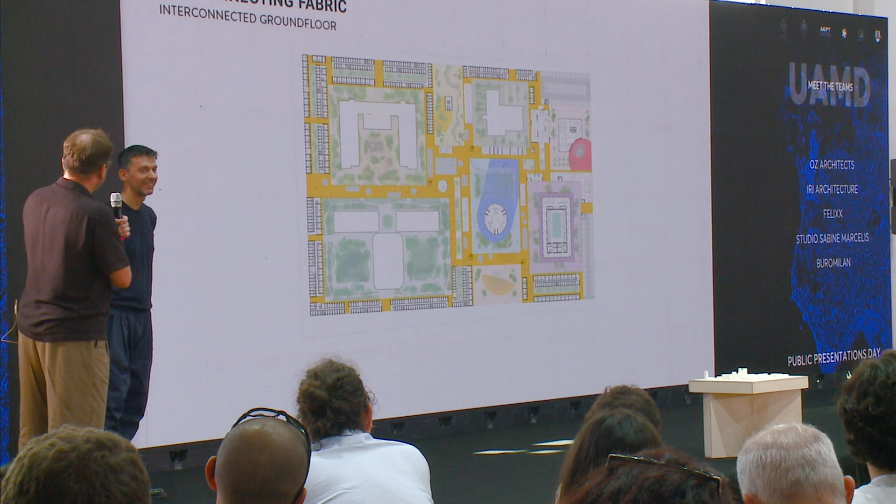And a question that I make to you, but it's actually a question for all participants, just because I don't know. What's the dimension of these rectangles, like 350 by something? This is 100, I think. No, how much was it? You mean the courtyard dimension, or the whole thing? The entire thing, how long it is? That plot, it's 500, no, it's 400. 400. Yeah. And yeah, it's of course very long, and that's why this permeable approach as well.

I mean, I'm fascinated by certain aspects of it. But it's undeniably, particularly you had this argument about financial stability. It's incredibly expensive, this thing, because most of the time it's only 2 levels, so the amount of structure for the amount of built surface is not so much. So it is very expensive.

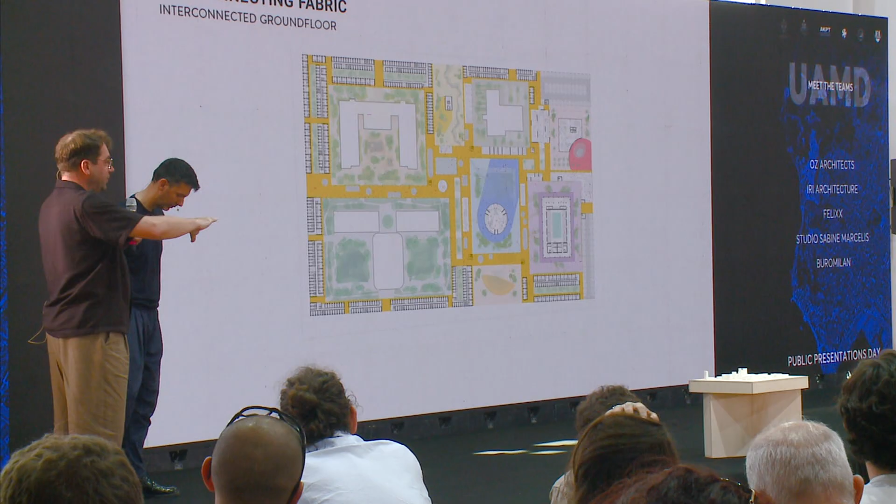I'd like to argue that a little bit. Please do. Because to bring the residential so low, we can exclude any elevators or escalators for my part. So making it a low rise is by definition more affordable.

The permeability, along with the canopies of the trees, allows for a lot of passive cooling potential. So we really hope the energy bill can be lower for most of the year. You don't need your air conditioning, and even the mini courtyards that we make help a lot with this.

The grid—every 6.4 meters we have a column—allows for a very flexible, adaptive grid as well. It is very slim, the spans are very small, and the floor plates can be minimized.

And we took a very conventional approach, building it in concrete that we think is locally feasible. That's the thought process behind it. Materiality was an issue in order to also create a space that is feasible.

But then you have rather expensive swimming pools and an administration tower, which don't follow that logic. Yeah, the tower is an exception in this, and let's say the reception of the public buildings is kind of shaded as well.

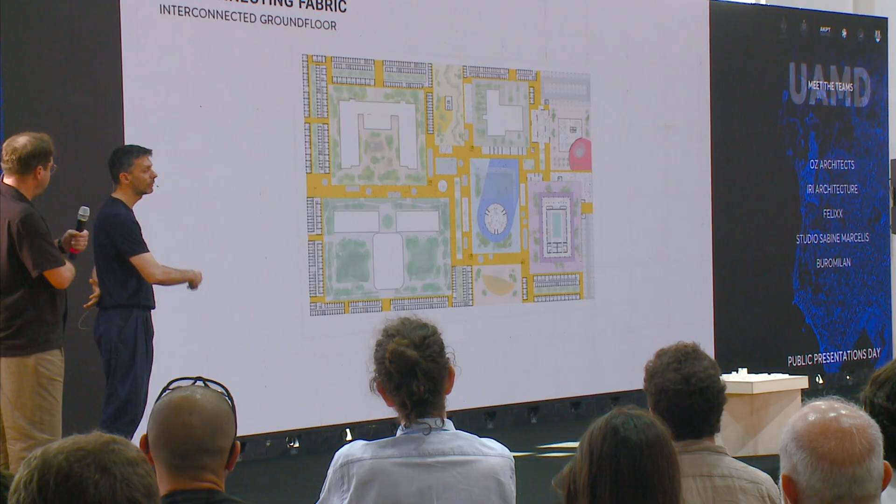And about the color—it's an added feature. We didn't want to add color to the buildings themselves, so the buildings become kind of neutral elements, and transparency was also important. So the color becomes a pattern that relates to the heritage and colors of the city in Albania.

And maybe a little bit also on this landmark—how the context will develop in the future is so insecure. It's almost like how the fortress of Durrës once arose on reclaimed land. It's a very similar condition, perhaps. So yeah, I think that's the main idea.

But it's not a walled city, eh? It sounds like it, but it's not a walled city—the ground floor becomes a permeable ground that can also adjust to the extensions.

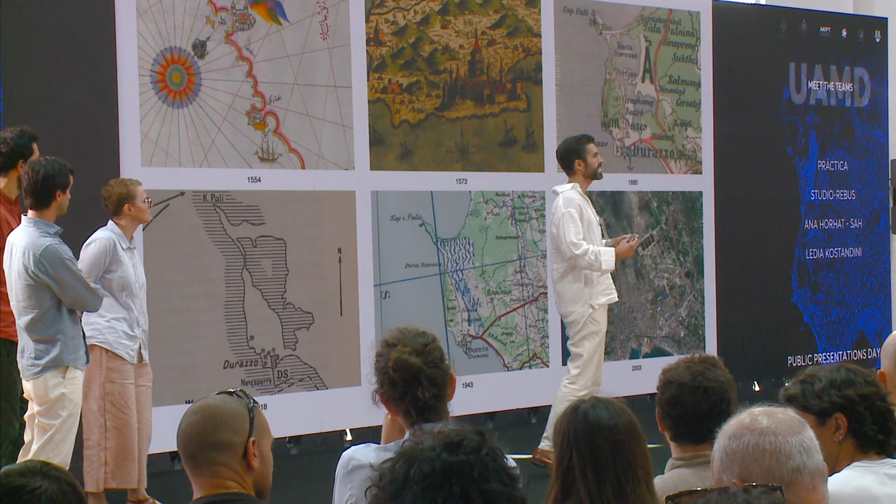We also looked at the history of the physical context of the site. We found it super interesting, marked by the land reclamation process carried out during the entire 20th century. That process transformed the marshland into agricultural fields, which became the framework for informal settlement. But in that process, they also created a system of orthogonal streets and canals that can become the basic tools for developing a new ecosystem, to regenerate the high salinity soil and establish a background where communities and knowledge can thrive in the future.

Finally, we also looked at the current state of the region of Durrës. We looked at some social political aspects, such as the location of different educational infrastructure, the mobility within the region, and the land use, but also some physical aspects like the location of natural and artificial green spaces, natural and artificial water courses, and the land coverage.

All of those ideas brought us to think of a concept that revolves around the notion of the grid and the notion of the academic quadrangle that Lorena mentioned before, the quad.

Regarding the grid, we looked into a lot of very different case studies: the Jefferson grid in the US, the Barcelona grid from the Cerdà plan, and the Manhattan grid. We found that there are strengths and weaknesses to all of them, but they become a lot more successful when they allow for diversity within their strict rules, as Koolhaas and Zenghelis established through their captive globe concept.

The second idea we worked with, that of the quad, was super interesting to us because we find that a lot of the centers of knowledge throughout history were linked to open, regular spaces that organize buildings around them. Those spaces could serve as platforms for the exchange of ideas, for discussions, and for gathering, as Iñaki Ábalos beautifully exemplified in his essay, Communal Palaces.

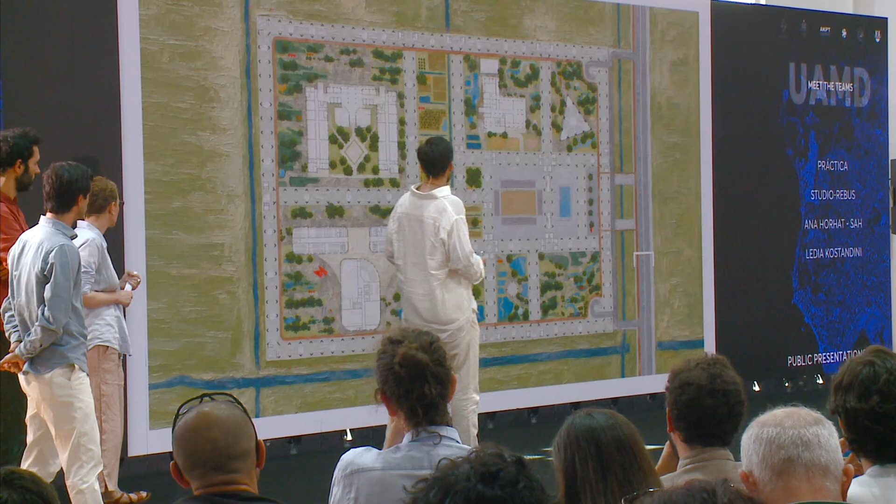So this is our ground floor plan, this is what we came up with. Here you can see that we're working with a concept of the grid, but it's a grid that is elevated from the ground floor. It touches the site minimally, with the least amount of material on the ground floor, so that it's all open.

That allows this elevated grid to cover the entire site, to hug the existing buildings, to bridge over the canals, to connect spaces of different nature, but also it allows for the landscape to grow continuously throughout the entire site. Here you can see a section and how the whole building is elevated all throughout, and it touches the ground in these very minimal points that allow for nature to grow and expand. And that also creates this open ground floor that invites people in.

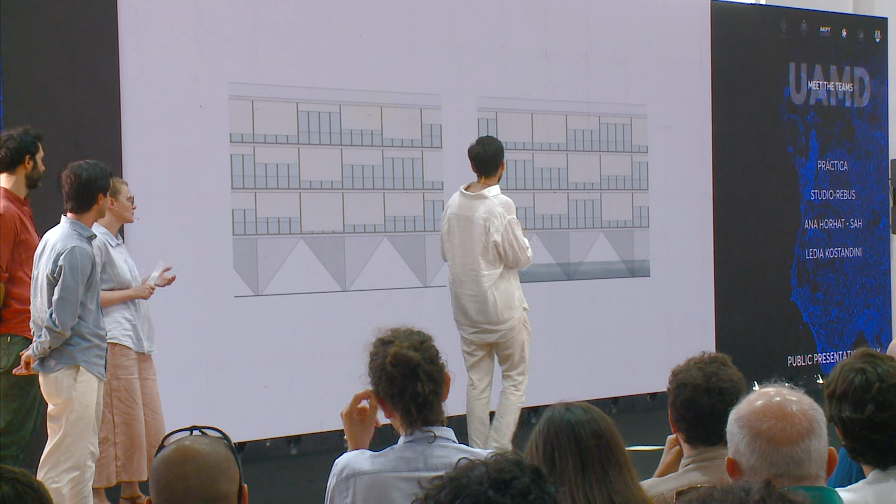We're working with the concept of a historical city center, a community center full of cafes, shops, and activities that are not planned, informal gatherings between people. You can run into people that you know here. It's just like the street of a city center that wants to continue the center of Durrës to this site.

And then this strategy of elevating the whole project also serves as a preventive measure for a flooding scenario, of course.

So again, this is an open system. We didn't want to think of an enclosed plan, but something that grows over time in accordance to the university needs. We're envisioning one first phase in this corner of the site that includes residential parking, sport facilities, and library, which are the main uses that students are going to require from the first moment, but also includes the innovation center so that the university can make some revenue from the very start through collaboration with private entities. Once that first phase is completed, they can jump into building the rectorate, the multifunctional center, the auditorium, and further sports facility, and then continue to build parking and residences all throughout.

And potentially in the future, the university can either expand out of the current site, or it can become the role model for other institutions and constructions to follow the same example.

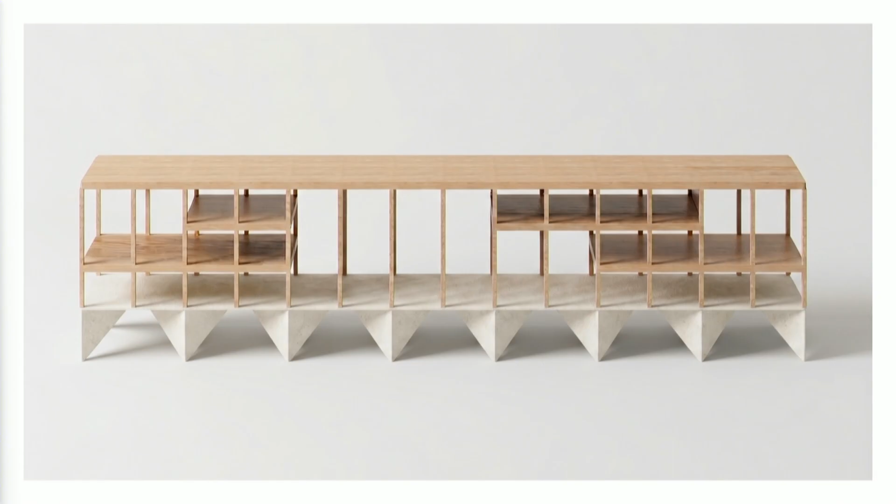Sorry about that. That same incremental nature of the project was projected to the section. So it's all a prefabricated structure, and you can take some of the floor plate pieces in or out to create double or height spaces within the same building.

And in fact, some of the branches that we're showing in the state of the project depicted in the plan or in the model are space reserves intended to be colonized in the future for additional uses.

Once we had this grid, this continuous grid of a building, this regular system, we started to think of how to break it up, how to introduce movements that were not as planned. And to that end, we collaborated with local artist Ledia Kostandini, who started to look at painting as a reference. She looked at the work by Paul Klee, by Joan Miró, or by Ibrahim Kodra.

By analyzing and deconstructing Kodra's work, she developed this super interesting language of recurring shapes in his work. For example, Kodra always uses similar shapes for depicting the eyes of his subjects, or the mouths, or the hands, but they're all organized throughout these regular grids. Through analyzing those motifs, she translated them into this language of urban furniture, pieces of devices that can serve for gathering, for sheltering, for lighting, or air conditioning.

And the architecture itself also has a few moments that stand out of the norm. So we have this clock tower that can become the icon, the symbol of the campus, or the auditorium that is not intended to function as a conventional lecture hall, but rather as an open forum where everything can happen.

And now Ana is going to talk a little further on the landscape. Which is the big one.

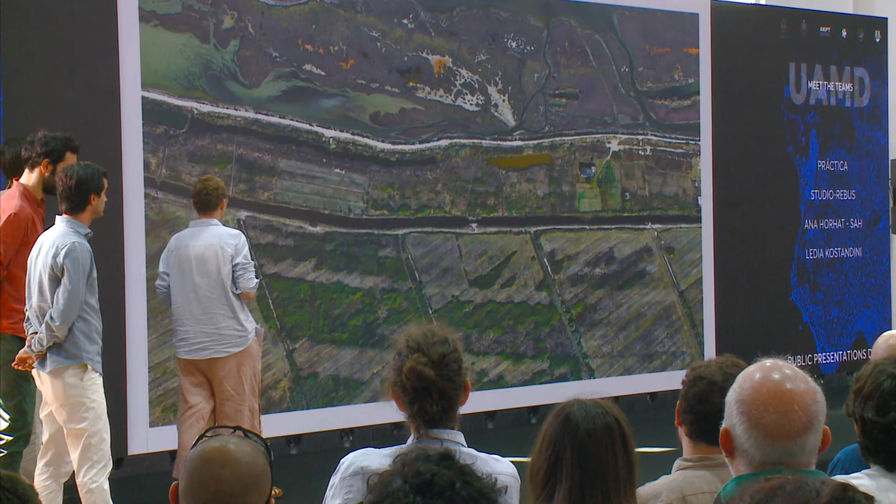Okay. Hello, everybody. This is not a campus. We are a few kilometers north. And what I love about this image is the fact that we can see almost in real time a big geomorphological process, sea becoming land, brought here by the rivers that flow into the Adriatic, then transformed into agriculture. But the soil breathes, and all these alluvials and salt beneath stubbornly try to reappear.

At the scale of our campus, we can see exactly the same thing. These tracks, patches, organic shapes, in total contrast with the imposed grid. So this ground is in motion. It has always been. And we became even more curious about this.

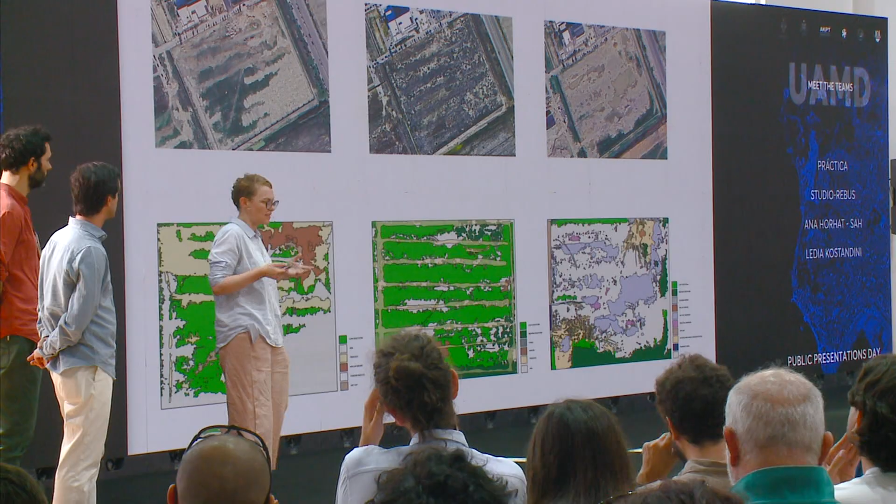So based on diverse geological studies we found, they confirm what the historical maps already showed us, the fact that here was proper sea, then marshland, then transformed slowly into agriculture. But the most interesting thing is, as long as this irrigation communal system worked, the image of this grid was perfect for years, as we can see in different images, but as soon as they stopped working, everything exploded.

The sea, the salt, and different patches appear, and together with human intervention, we can see it happening. This is only 3 years' succession. Some plants disappeared, others colonized, and shapes and patches exploded, as I said.

So we decided that our project starts from here: the fact that we don't want to block this movement, but work with it and even try to reproduce it at the scale of our campus.

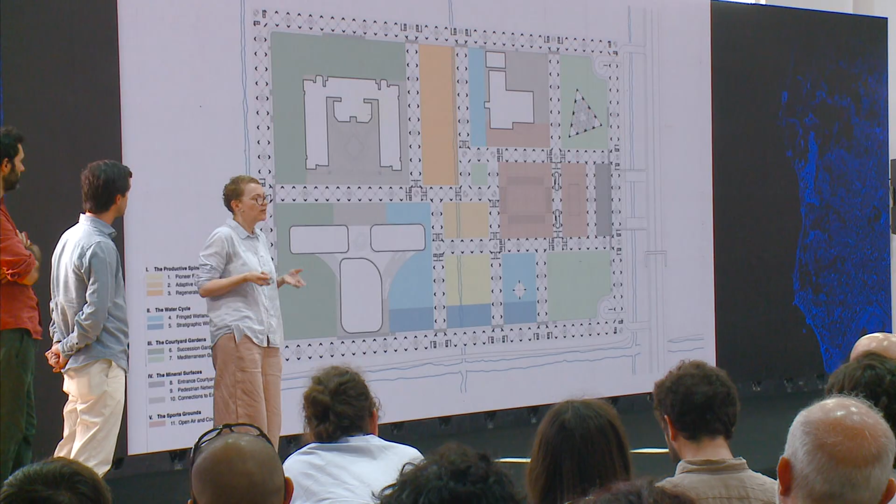So the project is everything around this existing canal, silted one, which became the backbone of a productive area, based in various degrees on soil conditions, from semi-salt experimental crops to more adaptive, rather small-scale orchards. On both sides we have gardens with different characteristics, more succession gardens on this side, so drier, more close to what we already have, and on the other side more lush mounds with Mediterranean vegetation.

And between the water in different shapes, basins, channels, and rain gardens - but we'll talk after. So this is our proposal with different overlapping layers of small and soft topography, water, different layers of vegetation, paths, but I think what brings everything to life is exactly this furniture, scattered like confetti around all the campus.

And the rainwater, the roof water, is captured, but part of it also flows through all these channels and fringe basins to flush out the salt from the surrounding soil, and then it's filtered through vegetation and gravel, and also captured for irrigation.

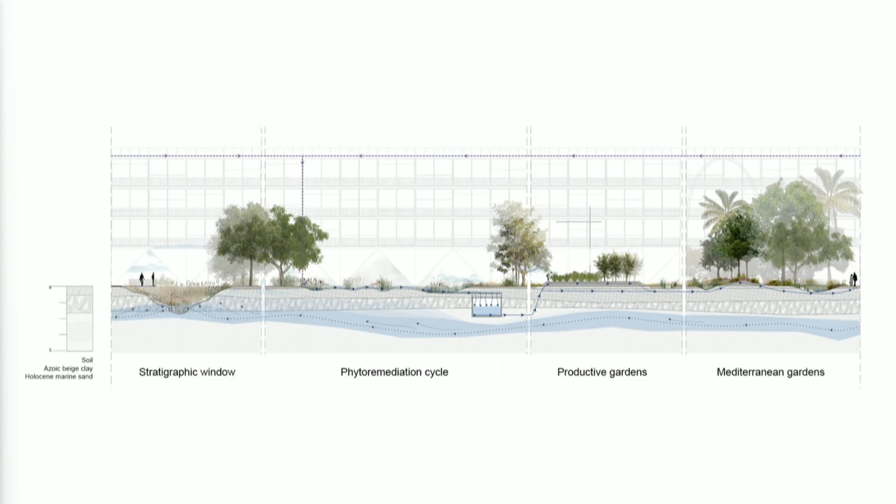We really analyzed a lot of species based on different soil conditions, salt, semi-salt, but also humidity or exposure, and all the biodiversity that comes together.

What I think is very important is the fact that this water system we imagine can work also as a sponge in flood conditions. The existing canals don't work, and we don't try to repair it through this project, but we try to reproduce exactly its logic at a smaller scale, more resilient.

Our project can be seen as a prototype. It can be easily reproduced in the neighborhood. But what I think is most important is that we didn't try to impose ourselves, but listen to the soil conditions and work with them.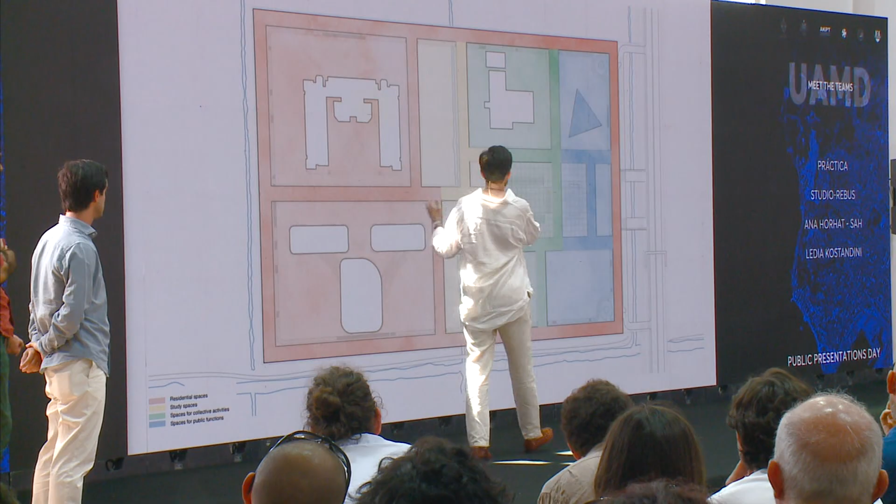In terms of the program of the project, we allocated all of the residential bedrooms to the perimeter of the site so that they all look outside and have similar sun incidence conditions, while the interior of the grid is organized in different bands with different degrees of privacy or publicness in their connection to the main street, those being the most public uses.

But the whole system is thought out on a strict 10 by 10 meter grid, able to allocate all the different uses the university is currently asking for. So the idea is that the university can change the uses of any of the spaces - some can be added, extended or shrunk over time according to their needs.

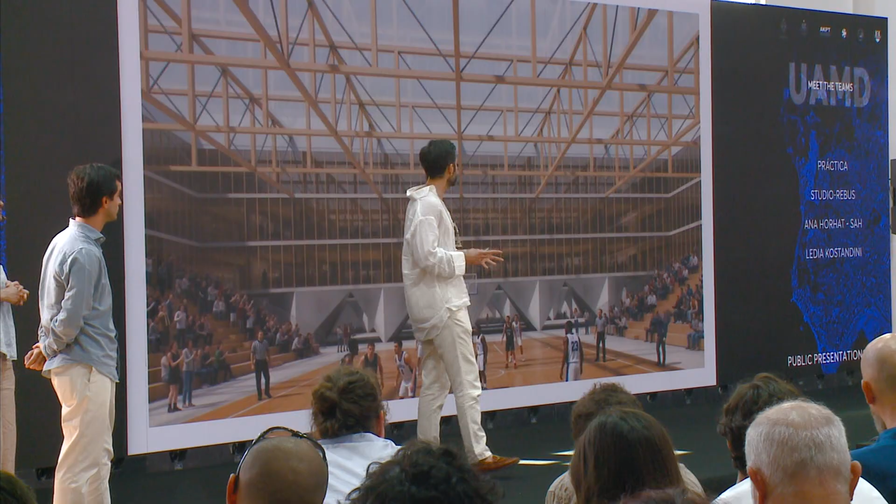Two of the big quads in the grid are enclosed by skylights to build up spaces for the sports court and the swimming pool. These skylights are openable with sliding glazed panels so they can be open air whenever there's optimal weather. Here you can see the sports court quad in connection to the surrounding adjacent vegetated gardens.

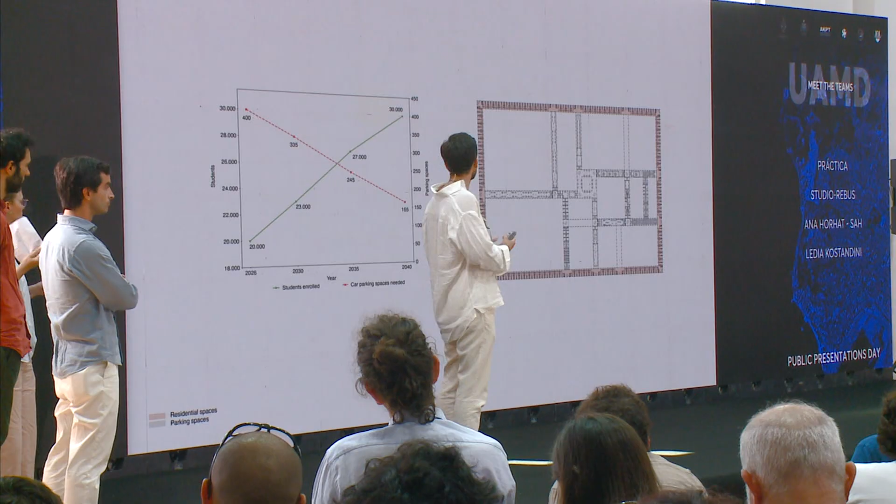Regarding parking, we allocated all the parking spaces to the elevated first floor, at the perimeter. The idea is that over time the university will have more students sleeping in, but the need for cars will shrink as the public transportation system improves in the city of Durrës. So over time we'll need less private cars, less parking spaces, but more residential units - all the parking is reversible and can be used for other programs.

In terms of the structural and construction system, it's built out of concrete in the lower level to use a material resistant to weathering and humidity, but the upper levels are all projected in prefabricated wooden pieces so that we minimize the carbon footprint of the entire campus.

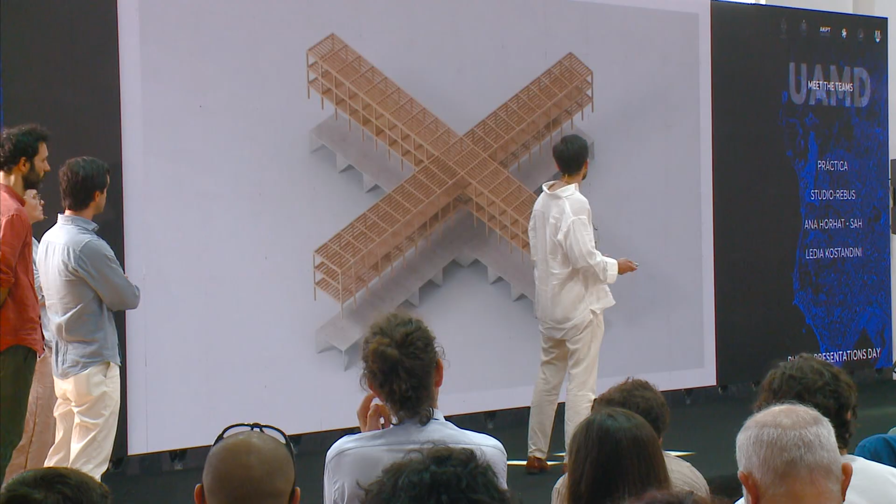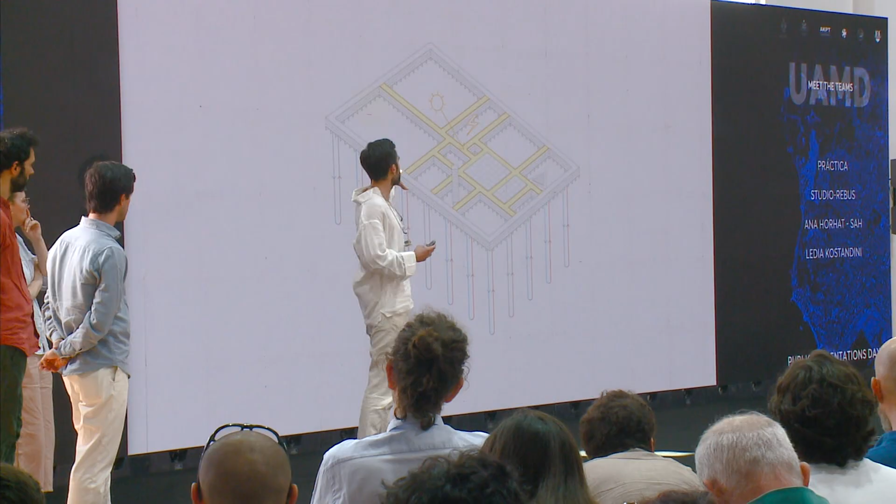The building also has a vast surface covered with PV panels on the rooftop, and that together with a geothermal well system spanning throughout the entire site can generate energy to feed the entire campus. So it would be a self-sufficient building from a power point of view.

The rooftop also has a running track looping throughout the entire perimeter, as well as some leisure spaces overlooking the views of the surrounding marshland. And that's it. Thank you very much.

You made it on time. Now the jury. If you guys have any more energy for questions, go ahead.

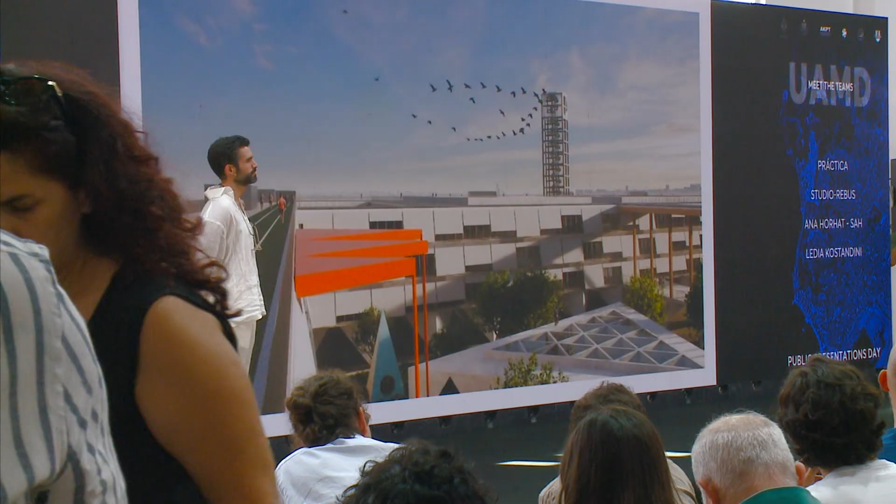Yeah, that's an excellent question. Thanks so much. It's true that, as I mentioned, we always intend for this system to grow and shrink and change over time. What we're showing on our plans and the model is basically the solution that complies with all of the program requirements reflected on the prompt. But it's true that that evolution is going to happen throughout a big span of time, so the architectural solutions might change. We are applying a consistent solution right now because that's a system that we think works better as we speak. But as the project evolves, or architecture evolves in terms of materials and technology over time, I think it would be really interesting to see more of a patchwork.

Where different phases executed in different times can show different solutions. And of course, you can also retrofit the parts that were done first, and those can also change over time. So not only will the new ones look different, but the old ones can also be adjusted over time. So it's true that you can end up with a patchwork of solutions that gives some richness to the system and also stands as a witness of the evolution of architectural solutions over time.

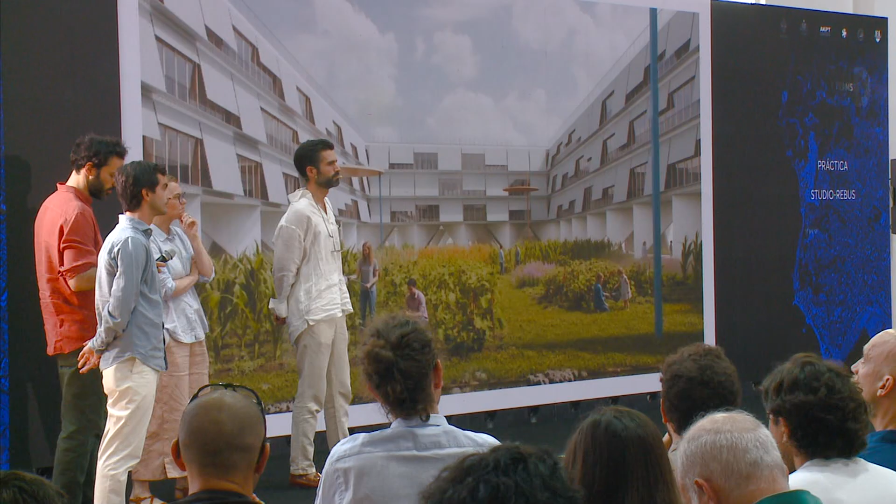Your colleague before said that they decided to have a building that was 3 levels high in order not to have elevators. Yours is 4. Do you have elevators? We do have elevators, yes. So we're also making a point for universal accessibility, of course, and we do have staircases on every intersection of the different branches of the project, and we have elevator shafts going with those, yes.

How would somebody, like someone mentioned before, and I think it's the experience of all of us, that a university building can be very confusing. Like, for instance, the school where I teach, I never know where to go. And these might be quite confusing as well. Imagine being the parents of a student visiting, and how do people orient themselves, how do you navigate the grid?

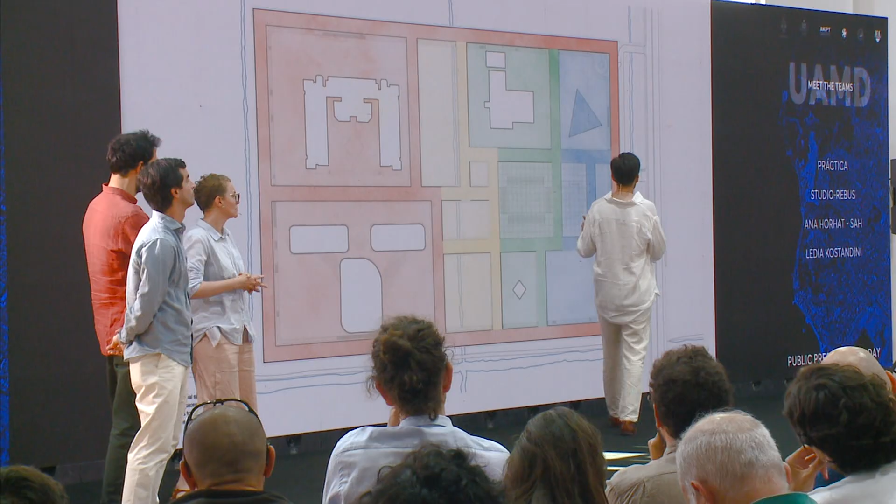So that's the reason we try to organize it in a logical way in relation to the access from the main street. Here you have the most public spaces, with the multifunctional center together with the auditorium and the rectorate, welcoming people from outside the university on a continuous schedule. In this area, you have spaces for collective activities that might receive people from other universities, like the Innovation Center and the sports facilities. Then you have the yellow spaces for more individual activities, for studying, where the library goes.

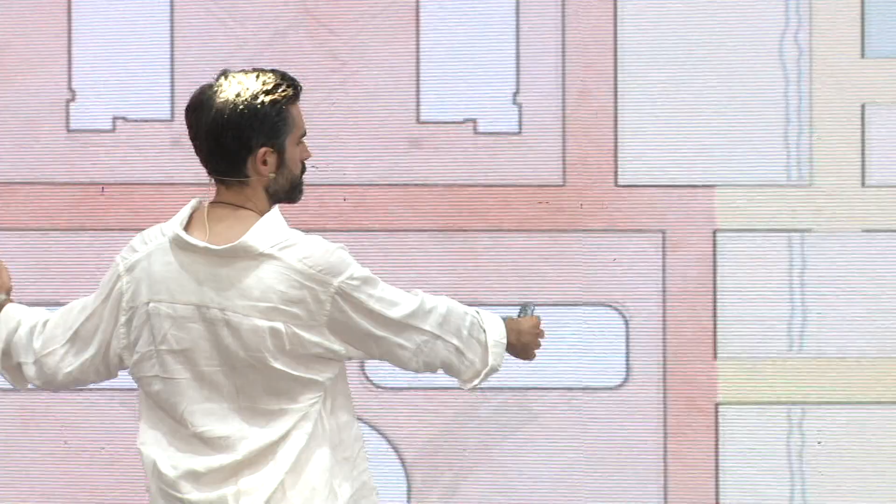And then you have the residential spaces, the common spaces for the residences and bedrooms, all facing a similar position in the perimeter. So once you enter the campus from the main street, you encounter this entrance plaza, and from there you go through corridors in relation to the publicness of the activity you're coming for. The most public ones are here, and as you go deeper into the campus you face more private activities, or residential if you're a resident.

So within the consistency and homogeneity of the system, we also try to organize things through a criteria of strategical connections. I would like to add that there's also, in a way, a hierarchy to the complex. It doesn't come from the buildings themselves, but from the corridors. There are courtyards, different spaces, different sizes, different types of vegetation, colors, textures, smells. That's how we develop a certain hierarchy within the system of the project.

I want to thank you as well for the really complete and beautiful presentation, and it's also really well explained. So I'll just ask a couple of questions about the phasing, because intentionally you're not showing how this system—and you emphasize the word system several times, it's not a project, it's a system—how this system can be developed, or how it can grow.

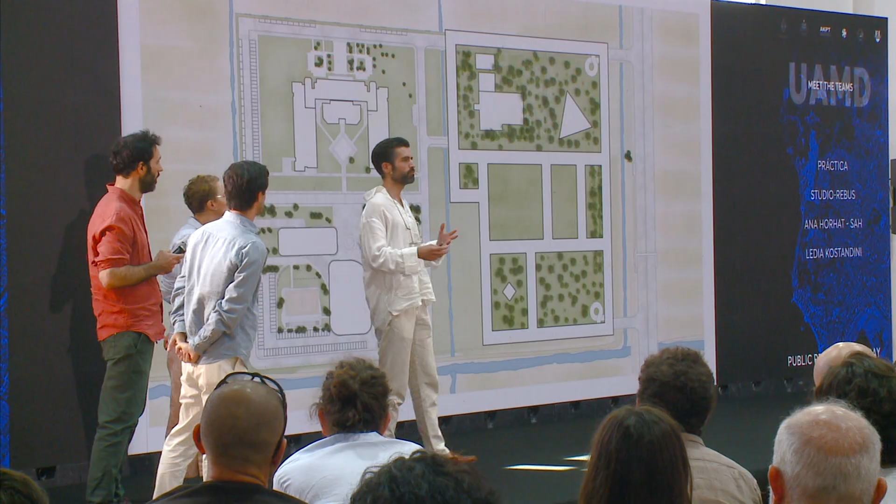So is this density needed to fulfill the program, or is it more dense than the program requires? For now, the stage we're showing does respond to the program in the prompt. It's true the program was vague in some points—they gave the square footage for some pieces of the program, or the capacity number of people for others, and some had neither. So we made our best estimation for whatever program was included in the prompt.

But again, I think the value of this system is that the program was established through a plan for growth from the university. But the university can decide that instead of housing for 4,000 students, they do it for 2,000 right now, or instead of such a large library, maybe invest in half of it. So once a university carries out their actual feasibility plans according to their budget, they can decide to do the project larger or smaller. We're designing modules that can be replicated, and they can decide how many to implement at a time. That's really the value of thinking of a system, not an enclosed or frozen building.

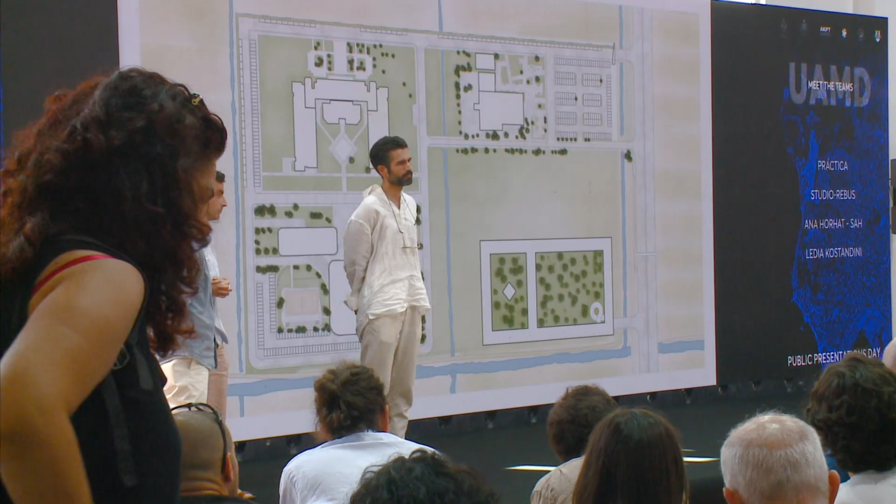I think it's quite an interesting proposal how to deal with how a school can change, because this is in the brief also a key question: how much space you need for a startup, how much you dedicate to research, how much to housing, can the housing change, and to have this modularity of a grid of 10 by 10 meters, saying this is the longest you can do for cross ventilation, the smallest you have to do to keep up certain large-scale programs. I think that could be quite interesting.

The price to pay would be that the library, foreseen as a main attractor, would be just a temporary attraction, and the whole building is nearly like a stage design. It will depend on the books you have and how you display them to still use it as an attractor. The same goes for there being no hierarchy in the building, unlike the previous building with the big tower where power is accumulated and the rector is probably on top. Here you need an address, a street number, an orientation system. It's also an interesting and strong statement for avoiding any notion of hierarchy in a university.

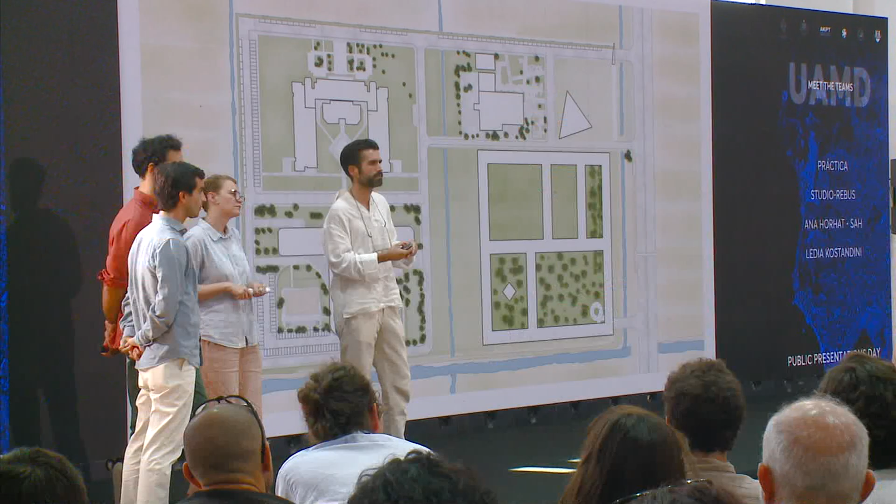If I can just add a question, because you are presenting a beautiful solution, and congratulations for your very careful work, in a way it is the dream of every master plan, because it is totally flexible, but still it has a totally architectonic, coherent proposal. So what are the variables and what is the fixed thing? If technology takes you to change completely the structure of the ground floor, is this allowable, is this reasonable? What are the rigid parts of your proposal and what are the flexible parts? And also in terms of outdoor spaces, if you change the program completely, will the outdoor spaces follow this? Are they also that flexible, or are they a little bit more rigid?

Yeah, of course they are. In fact, we imagined this because the essence of our concept was movement, the fact that everything is transforming. So also the landscape, gardens, courtyards will evolve over time. The succession ones, more drier, will become more lush as soon as the soil becomes regenerated. So everything is movable, changeable, and with us or without us, anyway, it will happen. So the landscape is not a fixed element, as we know.